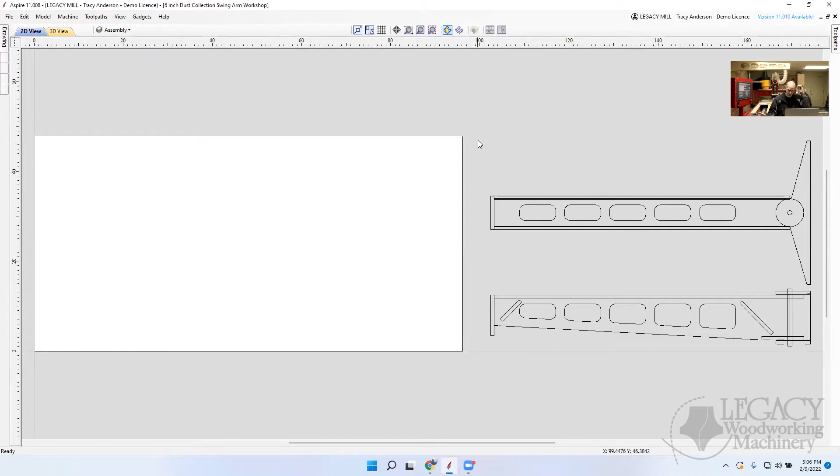Okay, so I've put this on separate layers. So at first, this is my assembly drawing that I just kind of figured out how far away from the wall and how long the arm would have to be. And again, this we drew up in Aspire, which does not have the tangent circle controls. And so I chamfered these, put a fillet on these corners, and so they're all the same. And it looks cool. I like it. I did it the other way before, so it doesn't really matter. But in Aspire, this was the way to do it.

And then I took all of those and I built on the actual 4x8 sheet. I laid out all the parts. Now I took our drawing from last time and I have updated it. I told you I would add some holes in here for the dowels and the mounting holes. And I added the dog bones in here so that we could set the pieces in. And I've kind of cleaned it up and got it all ready for you.

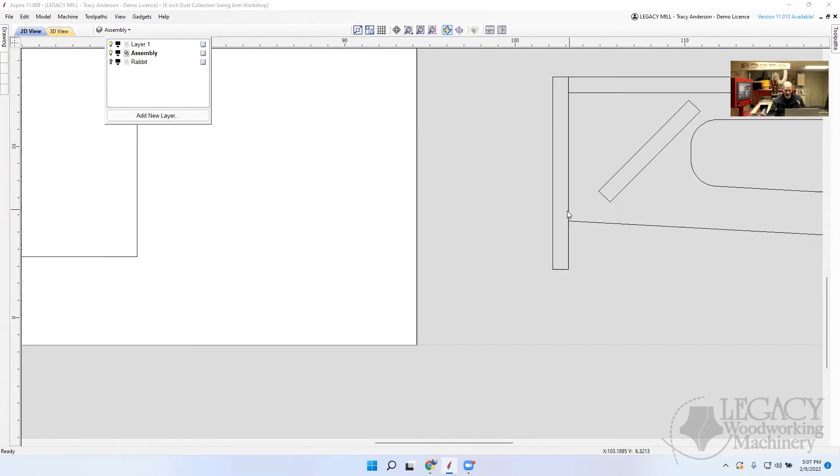And I actually added one more piece. If you look here, there's a cap on the end of it instead of open like the one I have up here behind me. It's just open. But the first one I built had a cap, and I like that. And so I added, this is the cap right here. Well, this is a nice mouse. And these are the screws to mount it.

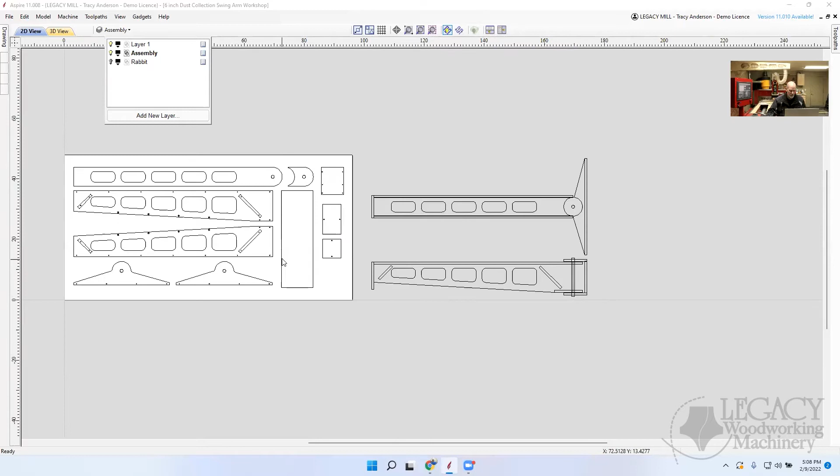And I also added some holes down here. I used the little zip ties, so I can zip tie the hose to this right here at the end to hold it up against that piece to kind of secure it. I also added holes back in here into this piece and in this piece here so that you can zip tie the hoses in at the beginning and at the end, and then we just let it sit on the dowels, which I don't have on my assembly drawing, but over here you can see they're right here.

Okay, so the challenge that I had was making this easy to extend longer or shorter without redrawing the entire piece. All right, so here's what I did. If I click on this, you can see that I have cut this into two parts, here and here. The same thing with this arm, here and here.

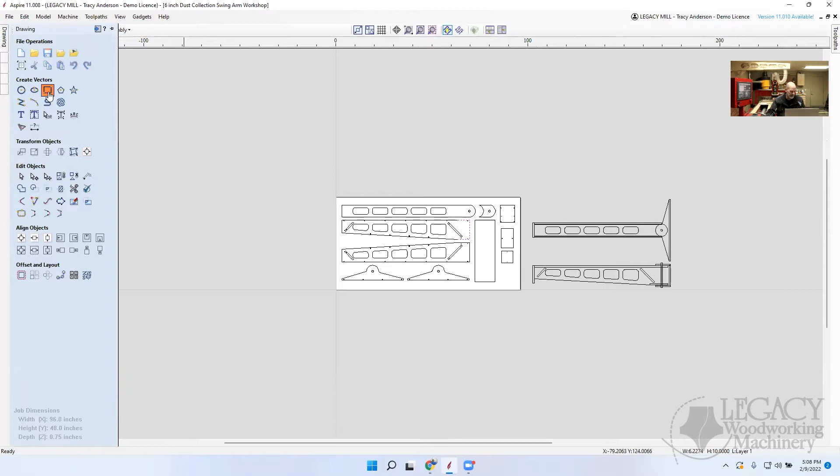So the way that I did that, maybe I'll just draw something up and show you how it's done real quickly. If you're brand new to this, it's kind of an advanced technique, but let me show you what I did. So I'm just going to select this, and I'm going to go into node editing mode, which is here on the side, or you can just press the letter N, and you can see I only have the 4 nodes, so I can adjust those nodes if I want. But what I did was I drew a separate line where I wanted it, like so.

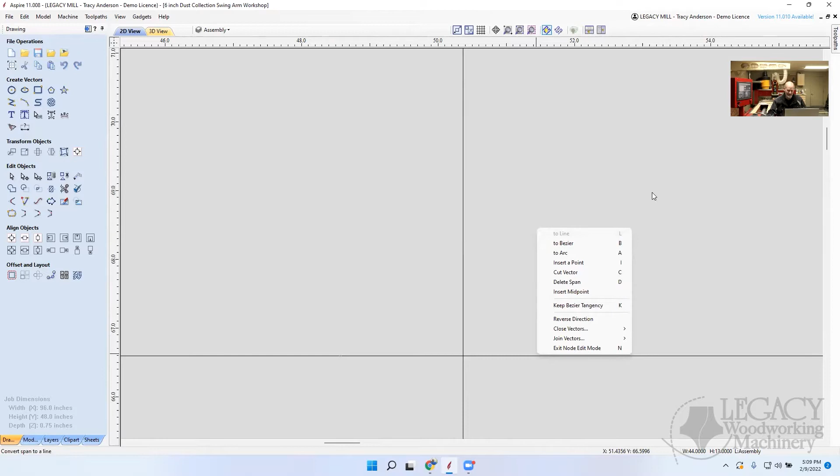And then I went into node editing and came in here, and you can try and do it right here, but it might be easier to just put it in here and say insert a point. And I can do the same thing down here. It doesn't matter where, I'm just going to say insert a point. Or what did I just click on? Insert a midpoint. Okay, so the midpoint is right here, which is not what I wanted.

But you can move those points. So I'm just going to drag it back here so it snaps to that point, and I'll do the same thing here. I'll grab that node and slip it back here. So now I don't need this any longer.

It was just a construction line, so I'll go ahead and delete it. And you can see now I have these nodes. It's still all one piece, but I right-click on this now and say cut the vector, and then I come down here, right-click and say cut the vector. So now I'll turn node editing off, and you can see I have this piece and this piece

separately. Now, the reason I did that was because if I scale this part, I'm gonna anchor this in, and I'm gonna scale this longer or shorter. I don't want it to scale this circle, or down here. I don't want it to scale any of this part right here. I want this to stay the same.

So again, I put a node right here at this point. Select that again. And you can see they're straight up and down right here. So at the end of the flat, I added nodes. And it's the same thing down here on this one. All right. So now I can scale this section down here without scaling this back section.

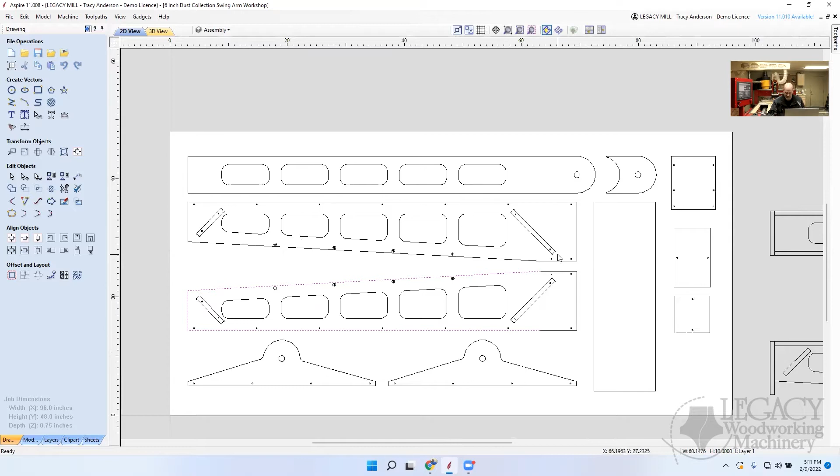Okay. So again, just to recap, I added a line up through here, and then I added nodes. Inserted points is what they call it. They're nodes, but they call it insert a point right there and there. And then I cut it. So I've got two separate pieces.

Right. Now, the other thing that I did is I've got these circles right here. These are 0.51 inches, so I can put a 1/2 inch dowel in here. And I know that when I scale this, these are going to deform, okay? Because the height's going to stay the same, but the width is going to get narrower.

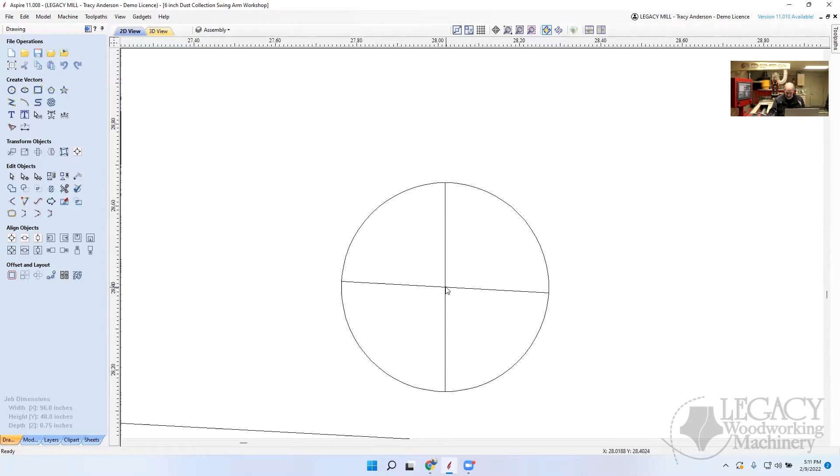So I drew these little crosshairs in here so that I would have a point right there. So I can come back and add a circle at that point, no matter where it goes. These will distort, they'll be no good, but I'll still have that center point with that crosshair in there. So I did that on all of my circles.

And what I did was, I'll just kind of sketch some in here for you real quickly. I'm going to Control-C, Control-V, and I'm just going to move this one down a little bit, right? And I had all of them along there, so I just took a line and I drew it through them, whether it was on the angle down here, you can see these are on an angle, or straight up here

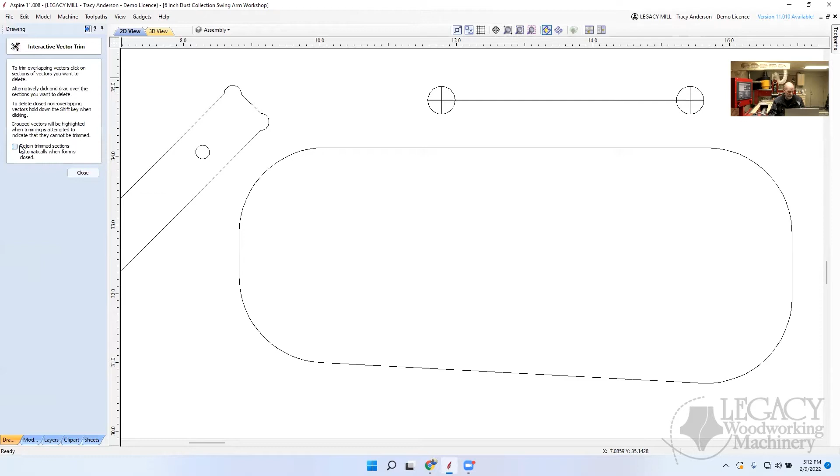on the top. And then I also drew a line just from this quadrant to this quadrant, and hit the space bar, it'll start a new one, and it'll turn to a little square when you get to that quadrant, so it'll snap perfectly. And then I just took my trim tool and I unchecked the rejoin. I don't want to rejoin anything. I just want to cut these. Okay. So that's how I added those crosshairs into each one of the circles real quickly. Now I'm just going to delete these because I don't want them.

All right. So Tracy, one of the things you could do also is if you are using a drill bit, you could leave those holes and let them distort. If you used a drill bit, then it would just go to the center of that hole anyways and drill the hole. Oh, good thinking. Yeah, absolutely. So if you had a drill bit, in this case, it would be a 1/2 inch drill, then you could do that. And because when you drill a hole, I'll just point this out real quickly. It doesn't matter how big this is.

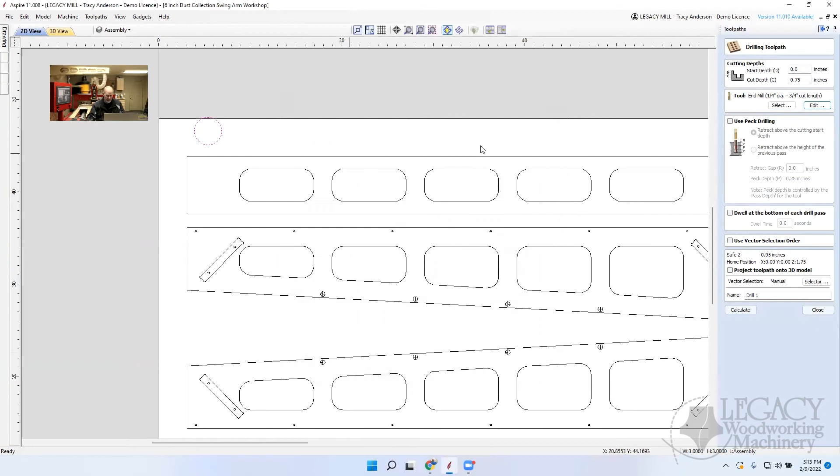If I create a drilling tool path, let me just move my face out of the way here. If I create a drilling tool path based on that, and I select the cutter, in this case, I'm using a 1/4 inch end mill. This is a flat cutting plunge style end mill, so I could actually do this, but I could choose a drill bit as well. And it's going to drill right in the middle of that circle, no matter how big the circle is. So let me just preview that and bring this over so you can see it.

Okay, so that's all distorted. I need to increase my resolution, but that hole is the size of the drill bit, not the size of the circle that I drew there. So that's a good point. I wasn't aware that you could distort a circle and do that.

So maybe I'll try that real quickly. I'm going to take this right here and just, we'll distort it pretty radically. And now let's go back into this drill, and that one's selected, and let's just calculate it.

And I'm going to move my face out of the way. I put it down here in the corner again, and let's preview it. And sure enough, it drilled it right in the center of that oval or that ellipse that we distorted. So that would work if you wanted to drill it.

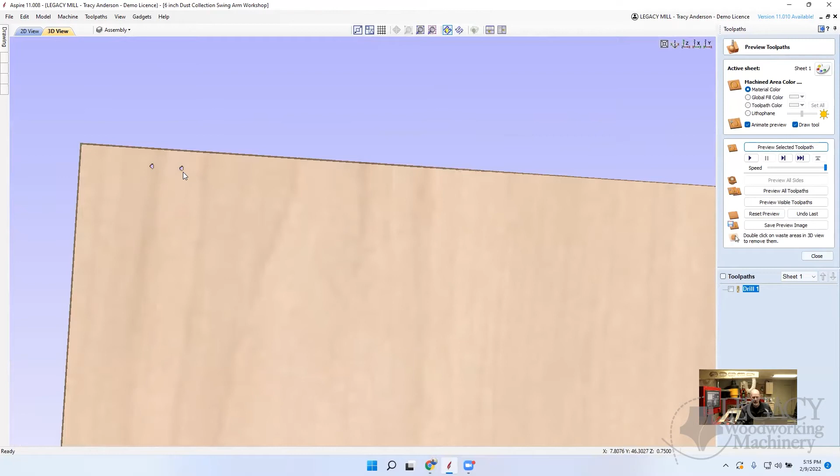Okay, I don't have a 0.5 inch diameter drill, so I'll use a 1/4 inch cutter and I will machine it out. Drill is going to be faster, obviously, and if I was doing production, that's the way I would do it. But because I'm only cutting one piece, I decided I'd use the same cutter to do everything, and so I'll have to redraw those circles.

So one final editorial on that, Tracy, is you just proved that if you have any object and you select it, it will drill to the center of that object. Exactly. Yeah, that's exactly right. That was pretty awesome. So I could drill to the center of this object, or even the center of this piece here, or this piece here, or anything that I have, you could drill in the center of that, even an odd shape, which is awesome.

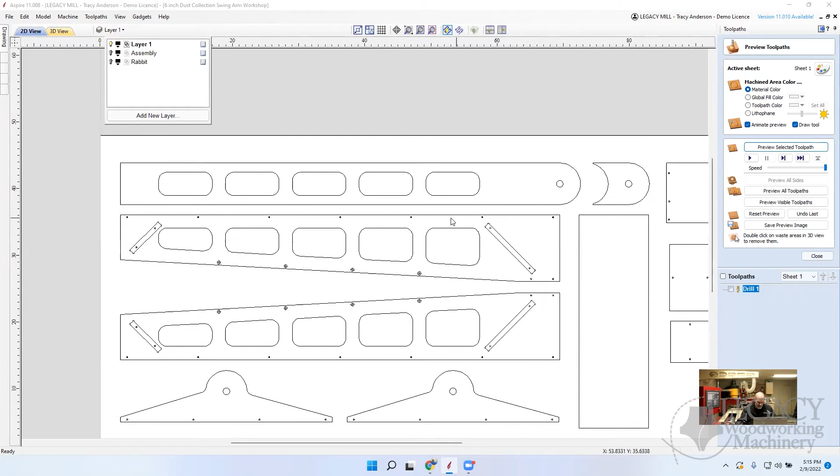Okay, so let me show you one other thing I did here real quickly. I went into my layers and I created one called rabbits. So if I turn that off, I can see just the part I'm going to cut out. But if I turn that on, then I can create a toolpath to machine the rabbit here.

Now, you notice that the rabbit is a little bit longer and a little bit wider. And I made them an 1/8 inch wider, an 1/8 inch on each end, and an 1/8 inch taller in this case. So it'll cut right to this edge where I want it, but it'll overlap the part. And so because I'm using a 1/4 inch bit here, that's an 1/8 inch pass. So in other words, it'll clean this corner up on all the corners.

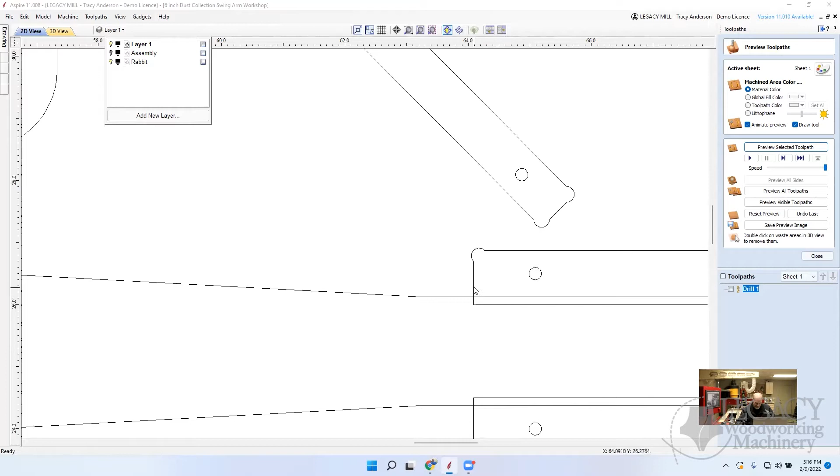And I did the same thing here. You notice this goes past it, so it'll cut a clean corner here, because if it ended right here, I would have a small radius right here from the bit. And the same thing here, I didn't want a radius here, so I overlapped them. And then on the inside, I put the dog bone here, and all those other ones. So that's how I prepped this up. And I did add, again, this one piece right here that I'm going to cap the end.

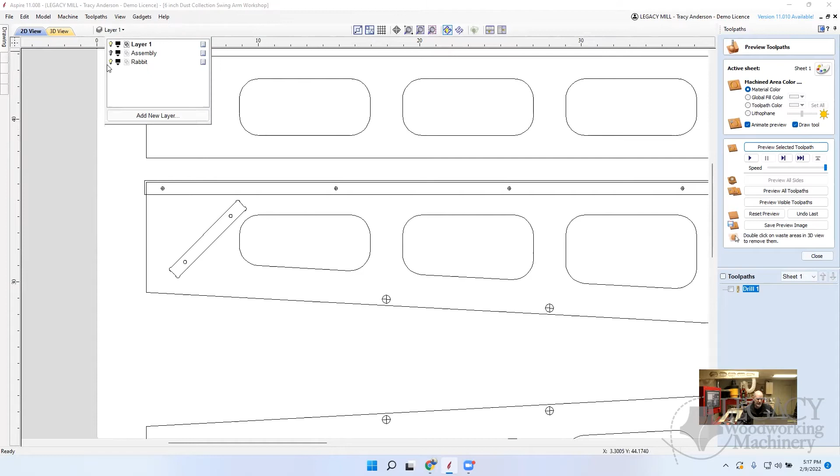All right. So now let's go ahead and do some distortion and scale it and show it. So if I turn these off and I select everything and scale it, these would not be scaled. So I'm going to leave them on. So I've got that layer turned on, the rabbit right here. So I'll scale everything. And I'm going to just click here, and I'm going to drag this out.

Remember, if you go left to right, everything inside of the frame will be selected. If you go right to left, everything that it crosses will be selected. So I intentionally went left to right so that I could grab just the elements that I want. Now, there's a few things I don't want to scale. For example, there's this hole right here. So I'm going to hold down my shift key and click on that to deselect it.

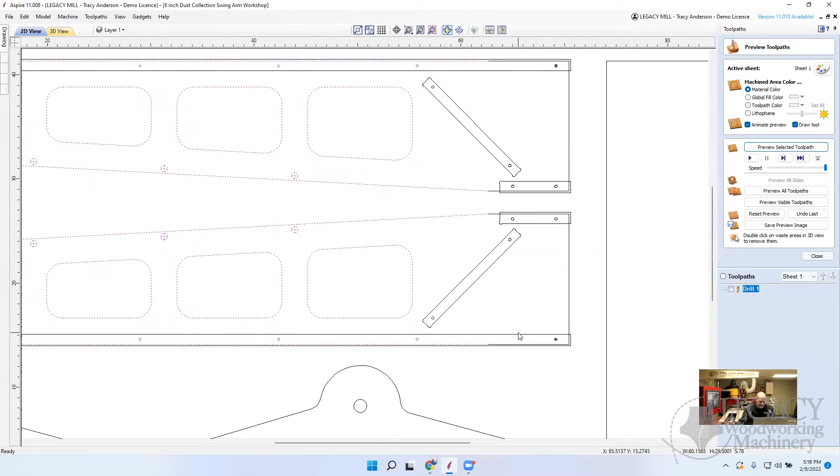So I don't want to distort any of this. I don't want to scale any of this. And then I'm going to come up here, and I don't want to scale this piece or these holes. And so I'd have to do that on all these parts. See, I had one there. And let's see what else. Actually, I want to scale the dados as well. So let's go ahead and select those. Okay, so now everything from this point forward is going to be scaled, but everything back here is going to stay consistent.

Now, there is a tool right here that you can click on to transform mode, which means move or scale. But you can do the same thing simply by clicking everything that you selected, click on it again, any one of the objects, and it puts it into transform scale mode.

Okay. Now you'll notice there's a little node right there. And when you mouse over it, we'll grab that, and I can scale this. Like so, I can make it shorter or longer. So what I would do, to be honest with you, if I knew I wanted to shorten this by, say, 5 inches, then I would draw a line.

This is the way that I would do it. I draw a line right here, and I would move that line into transform objects. There's a move selected object, and in the x-axis, I'd say relative from where it's at. Let's move it, maybe 5 inches. So let's say we want to shorten this arm by 5 inches, or we want to lengthen it by

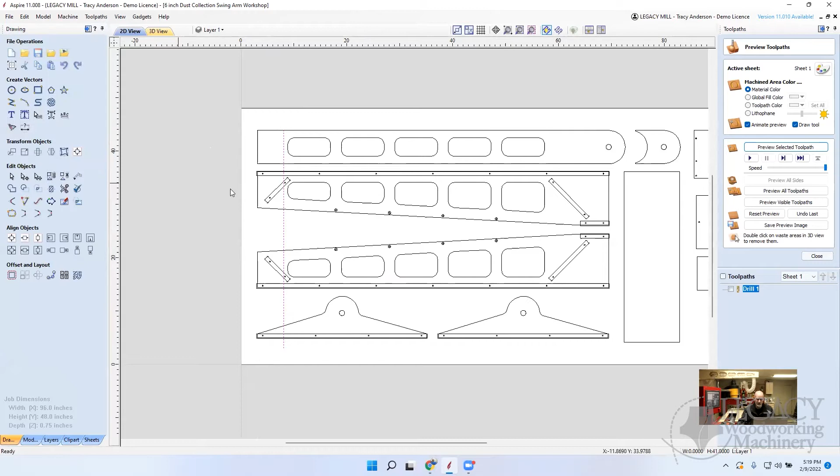3 inches or whatever. Now, if I made it a lot longer, I'm going to have to regroup all these things and make sure everything fits. And if it's long enough that everything doesn't fit on one sheet, I'd have to move some of these components to a second sheet, or somehow rearrange them so I could try and get everything in.

If I took and flipped this one here, then I could squeeze these together. You see how much material we could pick up here, so I could throw some of these parts in here. So there's some things that I could do to make it fit better, but I just laid it out simply like this. All right, so now we've got that line. Let's do this again. I'm going to come back to like so.

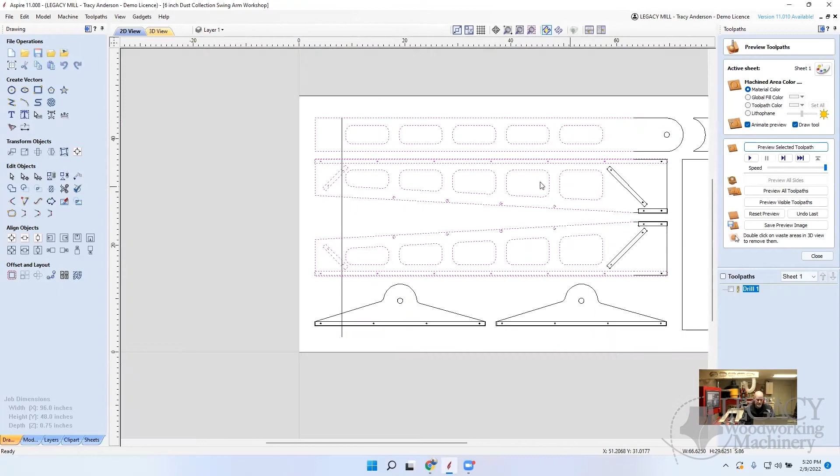Now, the reason it didn't select the rabbet, this rectangle, is because it was not contained inside of the frame. So I'll go back and reselect that. I'll deselect this circle and this circle. And down here, again, I'll deselect these items. And you could take this and say anything inside the frame, again, going left to right, anything inside of it will be selected instead of one at a time, like so.

So we're ready to scale all of this. Again, all I have to do is click on it a second time. I could click this icon over here for transform mode, or I can simply click on it a second time, and that will show up. Now, if I grab this corner down here, it would scale from the corner, so it gets narrower and everything. We don't want to do that. That's why I grab this one in the center, so it'll only scale from this point, and I'll just drag it over to, it snaps to this line. Okay, so now we've made it all 5" shorter.

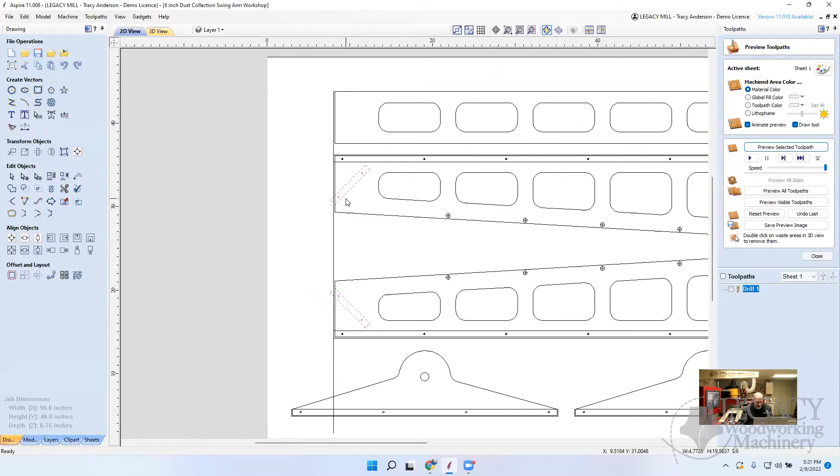And at this point, because I didn't scale these, I didn't want to, I'm just going to bring this in like this, and I'll just use my arrow keys to position it where I want it. If I want to get real critical, I draw a line from here at 45 degrees out, but I'm just going to line that up, and that looks pretty good. So you can get really critical here and draw a line at 45 and snap that to the line, but I'm just going to move it in like that.

And again, this line is just a construction line, so I'm going to erase that. Okay, so now it's going to cut everything out. It's just 5" shorter than the one that I drew. So your problem here, though, is that we could try to cut this out. These parts are not connected. So at this point, I'm going to turn off my rabbet, just get him out of the way. And I'll just zoom in here.

I could now select this and select this. And I could do the same thing with all of these components, and then just use the join tool right down here. And when I say join this vector, okay, the tolerance is probably too small, so I'm going to make it a little bit bigger and see if that'll work. And it's saying no. And I'm not sure why. Okay, I'm going to make it even bigger.

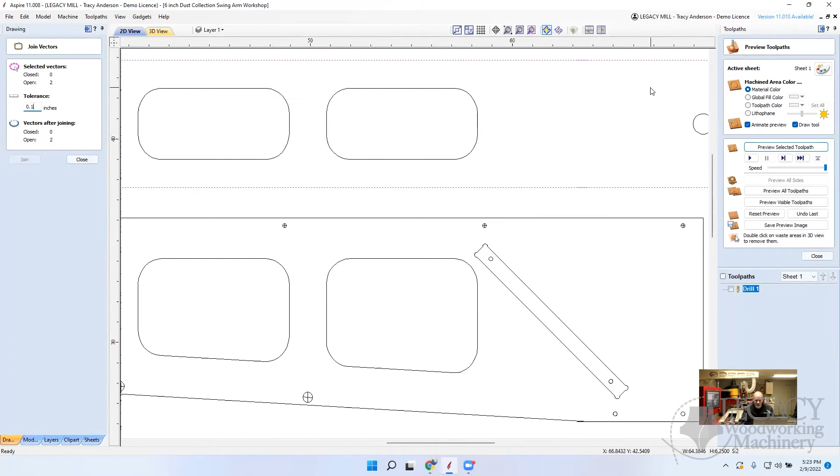That's funny. Why would it do that? There's an overlap on the two of them. There's, oh, probably right in here. Oh yeah, sure enough. Okay, so what we'll do then is we will use another tool. So this is join vectors to a straight line, or vectors with a smooth curve, or move the points so they're together. So this would be the one to use, because if this one overlaps the other one, then I would take this guy and click on that.

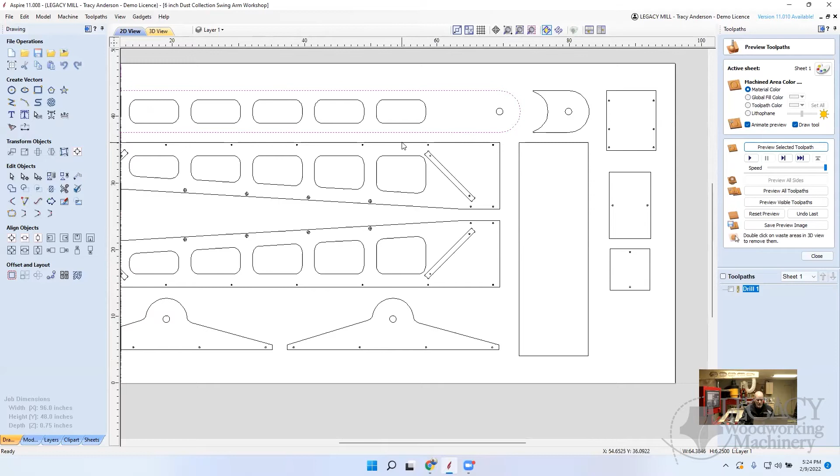And now they are one piece again, and it simply took the 2 points, one was longer than the other, and pushed them together. You got to do it twice. Got to do it twice? Oh, because we got one down here as well? Okay, so let's go ahead and do this one again. Oh yeah, sure enough, and that connected that one as well. So I would do the same thing with this. And I'm just going to zoom in here and see if we are overlapping.

Sure enough, we're overlapping here. So there's two ways. I can just say join those two together, or if I wanted to, I could double click on this and I could grab that point and move it back to here. But it's probably easier to grab these pieces and just join them. Let's just do that one right there. So I'll do this, one time and twice, and that should have connected it. And then we'll do the same thing here.

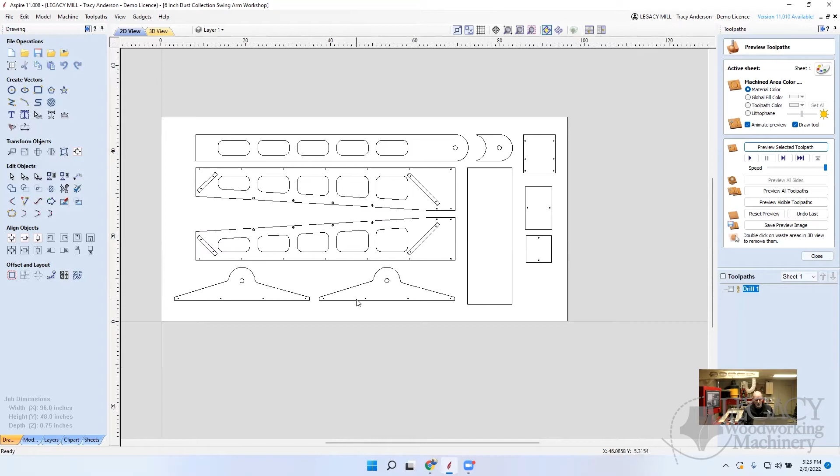Okay, so now all of my pieces are connected so that I can program this now to cut this all out. All right. I forgot to mention one other thing I did. I added in these holes here for mounting this, and of course added in the rabbets that will cut out. And I didn't like the way this came to a complete point, so I trimmed this back.

So this was 1/8 of an inch of material, so I wouldn't have a point in the material. And because I cut that back, I also cut this back. It was out here. I moved it back and I found 7/8 of an inch, 0.875, was enough to give me about an 1/8 inch flat right here. And I like that. So I did some adjustments from what we drew last week, but I'll save all of these. And I've got it saved, back to the other one.

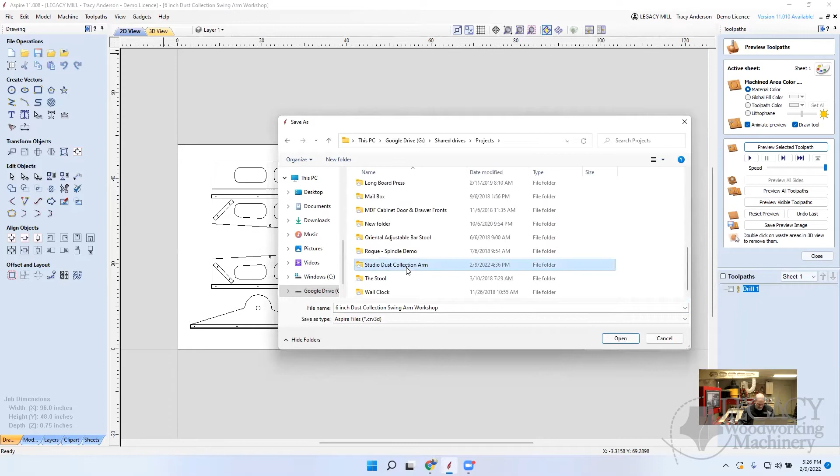So what I'm going to do now is I'm going to say file, save as, because I don't want to overwrite that one. And let me go into my file here, projects, Studio Dust Collection Arm. So this one's called the 6-inch dust collection swing arm for the workshop. And swing arm, I'll just put -5 for the workshop. Okay, so that's the swing arm, -5 inches.

So I've got a copy of each one now. The original, which is the one I'll post, and then you can follow these instructions if you need to make it longer or shorter. Okay, any questions to this point so far? Okay, then the last thing, of course, is just programming, and this is going to be fairly simple. The first thing I'm going to do is erase this drill because that was a sample. We don't want that in there.

All right, so I would not cut the parts out first. So I would take all of these. I have a question. Yes, please. When you resize like that, what do you do with the strength? That's an arm that sticks out there quite a bit, even though it's not carrying a lot of weight in itself. There's quite a bit of leverage.

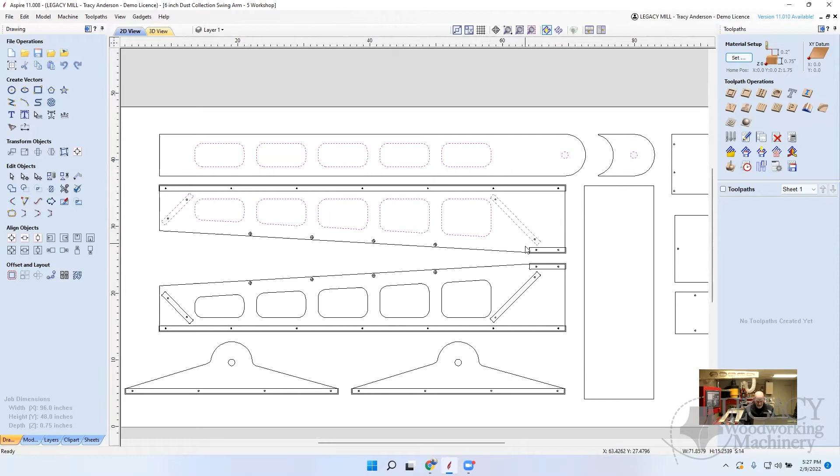Yeah, I've got this pretty wide, and I'll show you what we did here in the assembly. There's actually a 1-inch dowel that goes down through here, and I did cut an 1/8 inch plastic washer that fits right in here. And so it swings really, really easily. And because we've removed so much material with these cutouts, this is pretty lightweight. And if I extended it out a foot, I still wouldn't have any problem.

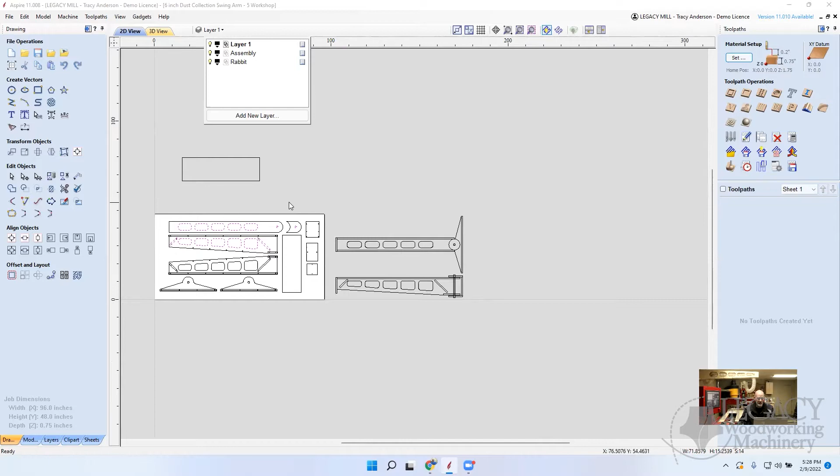The one I've got on here now is, I would say, probably 6 or 8 inches longer than what I need for this table. I didn't know where the machine was going to be placed when I designed and built it, so I made it longer, but it's too long, so I have to have the hose a little bit longer. And so in the last class we showed that if this is the wall right here, we want this end to be about 16 inches from the, well, let's say the arm was up here.

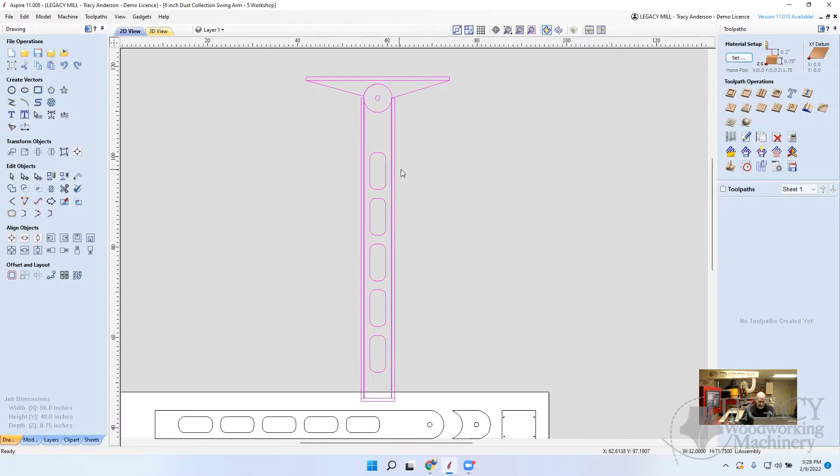Let me erase this real quickly. We don't need this. I'm going to just grab this guy, copy it and paste it, move it up here and rotate it like so. Oops, not that far. And what I'm going to do real quickly so I can make sure I can select this easily is I'm going to group these. So there's an icon here, edit objects, that says group them. And if I click that, you can see they're not dotted any longer, it's solid lines. That means if I click on any element, it chooses the whole thing.

The reason I did that is because if I bring it down here like this, I've got all these elements and then I'd have to go select each one of those to move it or get rid of it, which would be a nightmare. So I grouped them so that I could place this where I want. I would double click so I can move it. And I grabbed this end here and I brought it all the way to this edge. Then I wanted it back about 16 inches. So I would use my move tool right here, and I'd say relative in the y-axis, let's go 16 inches.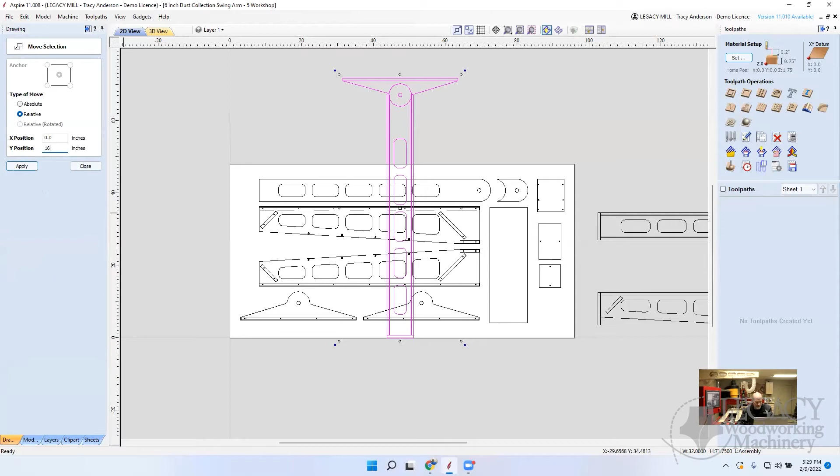Okay. And that's where I want the end of it. Now, this says that this from the wall, you see how far away from the wall it is, that table? Quite a bit. So I would draw, if this was, I think my table was 39 inches away. So I would draw a line along this edge. And then I would use the move tool under transform, and in the Y, I'd go 39 inches.

Oh, it's actually pretty dang close. Okay, so this one is designed pretty much at 39. It's only off by, you can see, 3/4 of an inch. So I probably wouldn't worry about this. I'd probably leave it. So this was set up for 39 inches and left 16 inches here. And so as it swings, the hose has to reach back here. When it's in the middle, it has to reach back to this corner. When it's over here, it has to reach out to this corner. So that's about right. Okay, so you can kind of play with those.

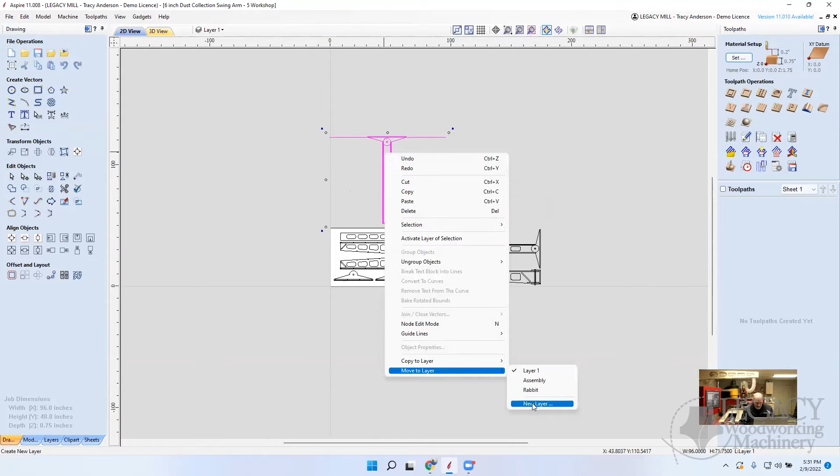And again, by grouping all of this, and I can group all of it, I'll group it again. Then if I click on it the second time, I can just move the whole thing out of the way. And I would probably move it to a new layer so I can turn it off. So I'll click on move to layer, I'll click on new layer, and I'll call this the swing test. Okay, or something like that, so that I can simply turn that layer off and my assembly off so they're not in the way.

All right, so let's go ahead and program this one. But if you cut the exact one that I built last time, you would have to make sure you join these back together and program it from there. You wouldn't have to scale it to get it to the length you want. So let's go ahead and program. And to start with, I'm going to turn my rabbet joints off. All right, so I'm going to select this guy. Well, no, we're going to cut out the parts first.

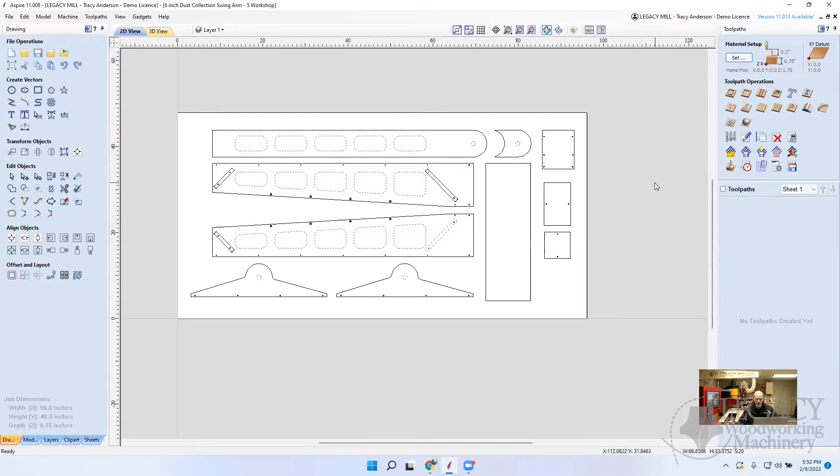If I go right to left, anything that it crosses gets selected. If I go left to right, only what's inside the frame will be selected. Okay, so we'll cut all those out, and then we can do the same thing here. Cut all those out, and that. No, we don't want to cut this out. I'm sorry. Those are only an 1/8 inch deep, so we'll do those separately. So I'm just going to cut out these. We can cut out these circles. All right. So we're going to cut all the way through here to remove all of these parts. Oops, I got one more. Yeah, there we go.

So now I'll go ahead and cut these all out, and we'll use the profile toolpath to do this. And I'm going to use a 1/4 inch diameter end mill to do everything, so I don't have to change the cutter. So when I cut out the rabbets, it's going to take a little longer, because if I used a 1/2 inch or a big surfacing bit, it would go much faster. But I'm going to do it all with a quarter, so I don't have to change the cutter at all. So this says it's going to go 3/4 of an inch deep. Okay, and that will cut all the way through.

If you had a spoil board and you wanted to add maybe 10 thousandths, I'd go 0.76 in the depth right there. Let me move my face over here out of the way on my screen. Okay, so I'm going to go just 10 thousandths through to make sure I cut all the way through. This is plywood and it's finished ply, so I don't want to leave an onion skin, because then it can chip or peel or be a pain in the butt to finish. So we make sure we cut all the way through.

And you can see here, I have chosen, this is a 2 flute. Oh, this is the 1/2 inch. This is not the one we want. So let's cancel that. We'll click on select, and we'll use an end mill, and I'm going to use a 1/4 inch, 3/4 of an inch long. All right. And you can pull the left side of that out to see all the.

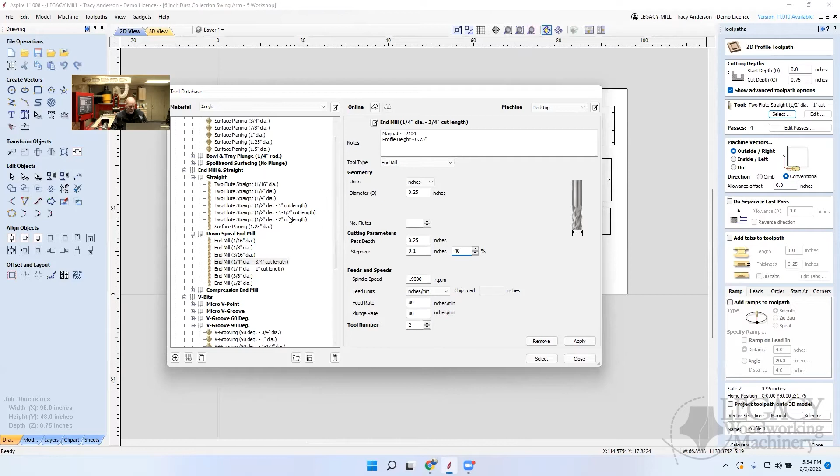Yeah, absolutely. You can pull this guy here out, and there's actually a way to go into your settings and save that so it remembers it. I don't remember the exact thing to set, but I think it might be under edit or it might be under file or whatever. But it'll keep this open this wide to make it easier. So next time you open, you don't have to scale it out again. But we're going to skip that right now.

I'm just going to grab this cutter. I'll make sure it's 40% step over. And we have a pass depth of 1/4 of an inch, which is acceptable. That's fine on this guy. And you might even push it a little bit; with a bigger spindle, you could push it deeper. In fact, I've seen it cut full depth, 3/4 of an inch in one pass. But we're going to be a little bit more conservative here.

We'll do it in multiple passes, just because if you got a smaller spindle or whatever, you want to take it a little bit more easy. So we'll be cautious here. And down here, I'm going to tell it has 2 flutes. And so that tells me that it's only a 2/1000 chip load, and that's at 80 inches. So I'm going to push this up. We're going to go 150.

Now, again, this is pretty conservative. I'd probably cut it about 300 inches on my 4x8. Okay, so on a bigger machine with a bigger spindle, I could push these numbers up. You can always adjust it on the fly as you're cutting as well. So we're going to program it for 150. Again, kind of conservative, but when you see that, it's about 4 thousandths of an inch, 0.39.

So I'm going to slow this down to 16,000 RPM, and it calculates the chip load over here based on the RPM and the feed rate. So we're at about 5 thousandths chip load. Okay, and that's doable. We could actually push it up to about 8 thousandths and be fine. So we could push it down to maybe 14,000. And that makes it 5.5 thousandths.

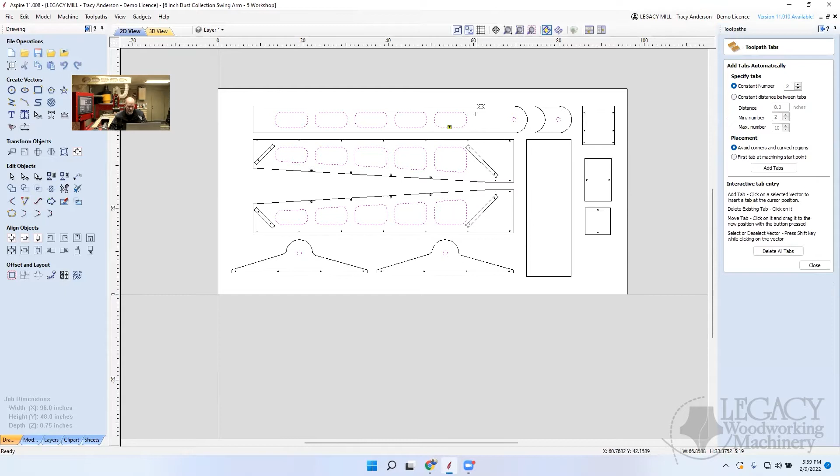All right, and then we're not going to add any tabs here. Although you might want to. If you're using a 1/4 inch bit, you may not need tabs. But if you want to add tabs, click on here, and then you can go in to say edit tabs, and you can tell it exactly where you're going to put a tab on these if you'd like.

Okay, I'm not going to tab this right now, and the reason I'm not going to is because if you use a down cut, which I use so I don't tear up the top grain, it's a spiral down cut, it will push the sawdust into the groove behind it, and that will hold the part in place. Right, so this works well.

Now, just one heads up, these 1-inch circles here, that's a little small. And if you're nervous about that, I would not include these circles with this profile toolpath. I would do this as a pocket mill. In other words, it would turn this whole circle into sawdust. There would be no little piece left in here that could catch the bit, right?

So that is a very legitimate way to do it. It's slower because you got to turn that whole plug into sawdust instead of just cutting around it, right? But just something to be aware of and something you might play with. Okay, in fact, I'm going to do that. I'm just going to deselect all these 1-inch diameter holes. We're not going to push our luck, because if the bit grabs that, it can bend the bit and cause all kinds of problems. So let's eliminate those and just cut out these bigger circles. We're not going to use tabs.

All right, and we are going to ramp, and I like to use just a smooth ramp with an angle of 20 degrees. That's the optimum angle for ramping for pressure on your bearings of your spindle and the tip of the router bit. Okay, so that's the default that you'll use for this type of work. All right, so we've got everything in here set.

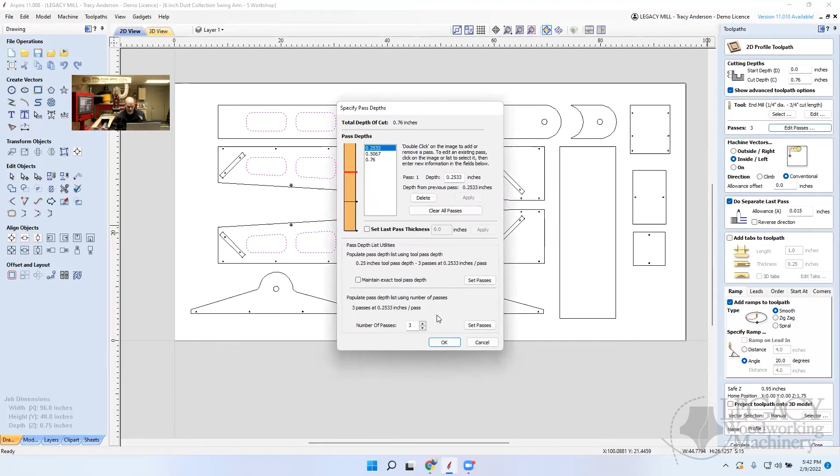Okay, to be honest with you, I personally would probably set this for 2 passes because of the size of the spindle, and do a separate last pass. And so instead of 3, 2, it's going to speed it up. That's the way I would do it. I feel comfortable with that. If you're uncomfortable, make it 3, but 2 is going to work. I've seen some stuff done where they do it in 1 pass.

They just slow their speed down, and they cut it in 1 pass. Okay, perfect. Right, so it's going to be called profile 1. So I'm just going to give this a name so I know what it's supposed to be doing, and I'm going to say cut out details or something.

All right, and it says it's going to cut through, and it's always going to tell you that. It says the material is 0.75, you're going to go 0.76. I'm saying, yeah, I know. Okay, I'll accept that. And then it'll always bring up your preview, and just click on preview, and you can see. And if you want to, you can double click on these components, and they'll go away.

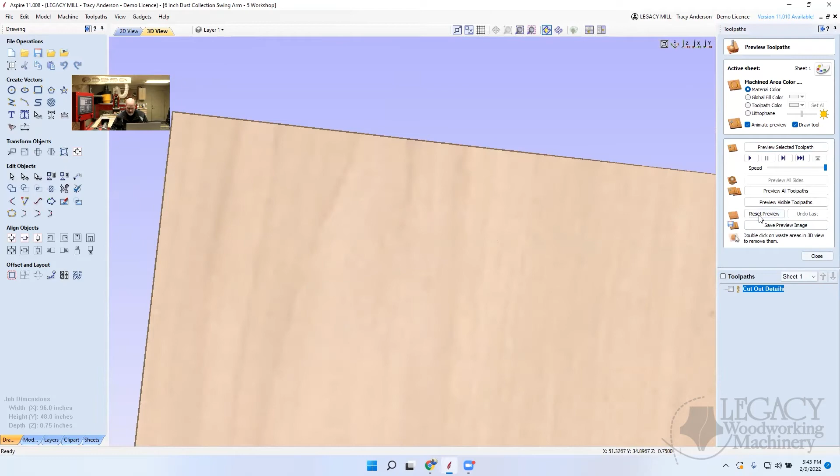And I just noticed I still have these holes up here from before, so I'm going to reset my preview and then preview this, and so those holes are gone because that was left over from the last time I did it. Okay, and if we want to take the time to double click, you can get all these out. I'm not going to do it right now.

We'll go on. How do you feel about using a compression bit instead of a down bit? Compression bits are great, but you're going to do it in 1 pass, or you can do it in 2 passes as long as your first pass is deeper than the upcut on the bottom, and typically they're about 1/4 of an inch. So in this technique, it would work. You could, but I'm not going to.

The only thing is, I'm not going to ramp with a compression bit. I'm just going to plunge straight in and cut all the way out. Okay, because if you ramp, where you're ramping down in, it's lifting and it's going to tear the grain right there where it starts. All right. But I like compression bits. We're okay with this without a compression bit.

I use it on melamine, definitely, but on this ply, because it's sitting on the spoil board, it's backed, so I really haven't had a problem with a downcut on this type of setup with this material. But a compression bit's perfectly legitimate. All right. I know a lot of people go to compression, go to a 3/8, gives it a little bit more strength. It has to remove more material, but there's trade-offs on that as well. And again, a little bit beyond the scope of this class, but it's doable.

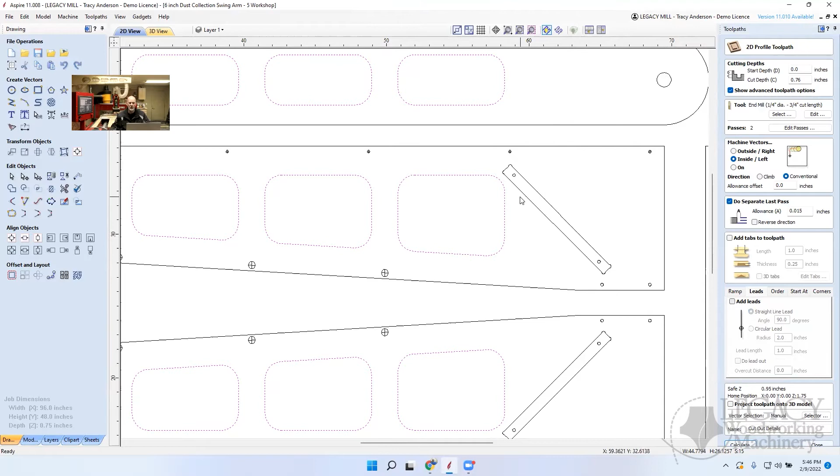But the lead-in, if it's on a straight line, cuts into the line and then starts cutting along the line. And a ramping on a lead-in would work. I'm just not sure it'll work with these closed vectors, and so I'm just going to use a down shear and ramp the half inch. So all of those are perfectly legitimate. It does work. You just have to lead in from the inside of your cut. Okay, versus the outside of your cut.

Okay, so let's go back to leads and add a lead in. Okay, we got a straight lead in, we got a circular lead in, and radius, lead in length, 1 inch. Now, do we know this? Is it going to lead in from the inside because we're cutting on the inside? Does anybody know? Leads in from the outside. Okay, I'm gonna just try this and we'll see what the toolpath looks like. One or more leads were clipped or removed.

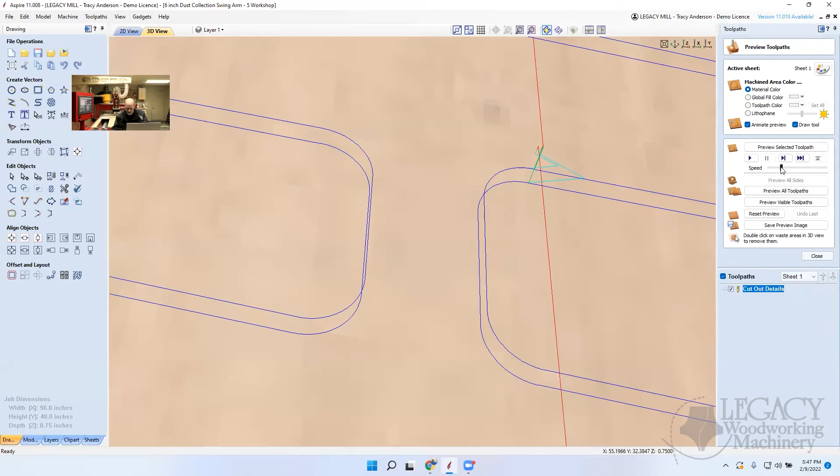All right, so you can see the lead in right here. Yeah, this is actually here, and it's leading and it's doing the ramp, so it's doing this zigzag thing, and then in. Interesting. So I'm gonna reset my preview. I'm gonna slow this down, and we're going to select this and see. I'm zoomed in close so we can see it when it gets to this point. I may have slowed it down too much.

Okay, yeah, it was too fast. I sped it up too much. Okay, again, you could play with lead in if you want to use the compression and then you could ramp in. I'm not going to on this one. I'm going to use my down shear, and we're going to take the leads out, and we're going to calculate that and save it. Okay, so now I'll zoom back out. I'm going to reset and preview it. So that's the way we're programming this one.

You're now doing this on a vacuum table, is that correct? Yeah, I would do this on a vacuum table because it's going to hold the pieces down. These will be held because of the down cut. It'll kind of put sawdust in these grooves, and that will act as a method of holding a part. The smaller the diameter cutter and the bigger the part, the less likely it's going to cause a problem. And that's exactly why I took these circles out, because I didn't want it to catch the edge of the cutter and cause a problem. So these we're going to do differently. But yeah, vacuum tables are great for this work, for sheet processing.

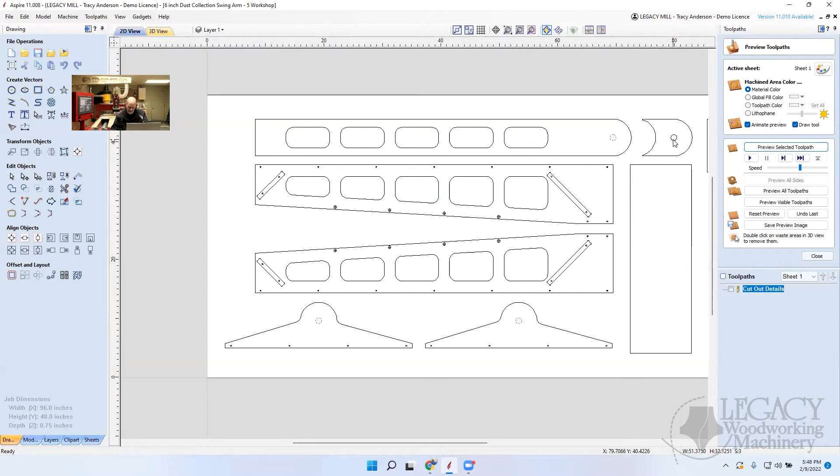So I'm going to grab all those circles, and this time we're going to use a pocket toolpath instead of a profile. And this is using a couple of mills. So I'm just going to remove all these, and then I'll say select. I just hit the remove button. Sorry, it went really fast there. But I'm not going to use another cutter, because you can use a larger cutter to remove most of the field, and then a smaller cutter to cut the corners by using multiple cutters, but we're not going to do that. I know there's a way to save it out like this, but I'm not sure how to do it. This is version 11.

It's changed a little bit, but I'm going to use the same cutter again. This is the end mill 3/4, still bit number 1. And it remembered all of those because I applied it and saved it all in here. It remembered everything that I had done before. Well, I haven't got to those other circles. I'm sorry. We'll get there in a second. So the cut depth is going to be the 0.76. We're going to use the end mill. It's going to do it in 3 passes, which is fine.

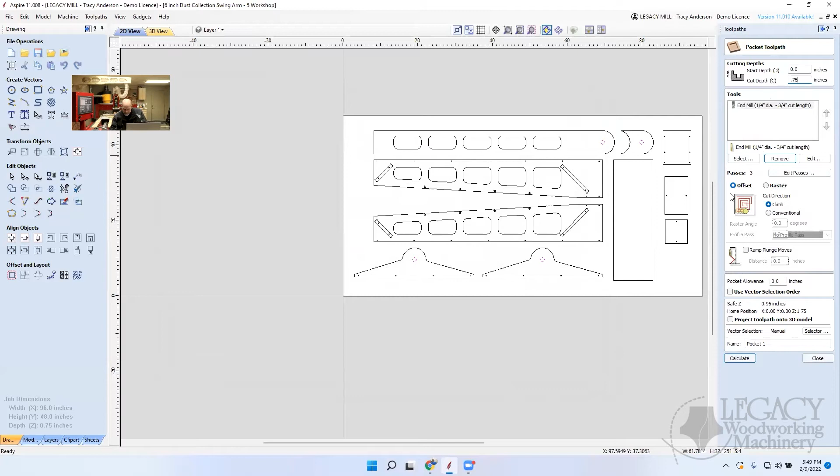We're going to use an offset, so it's going to cut in a circle, and it'll start in the middle. I'll zoom in. It'll start in the center. It'll roll out so it gets to the outside. Raster means it would cut back and forth like this and then cut around. I don't like this for the small diameter, so we're going to do an offset. And we'll ramp this. And in this one, because we are doing a pocket, we don't have any control over ramp other than the distance. We can't do a spiral. We're going to use the spiral on those other holes, which I'll show you in a second, because a profile toolpath will do that. A pocket will not.

So in here, I'm going to make this a very short distance of 0.25. So it's going to come down pretty fast, but it will ramp okay. And then we'll call this pocket 1-inch holes. Calculate that. It's going to cut through, and now we'll preview. It's the same cutter, so it's just going to cut these first, and then it's going to go grab these and cut those next. And we can create the toolpaths in any order, and then we can rearrange them if we'd like.

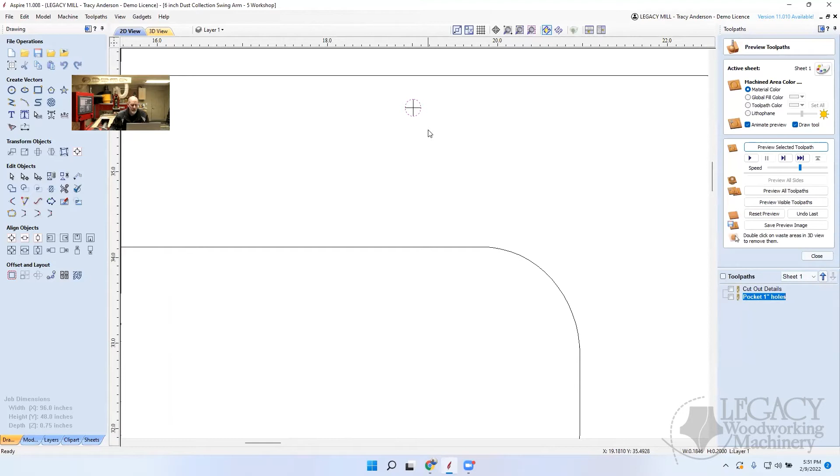Okay, let's drill all of our holes next. Okay, and this is an issue right here. This, we can actually leave that. I didn't realize this before, but because we're going to drill these with a drill bit, I don't need to have these crosshairs. We could have deleted those and done away with it. I didn't have to do those. Down here, though, because we're machining these out, I will need to do that. So let's create a circle right here.

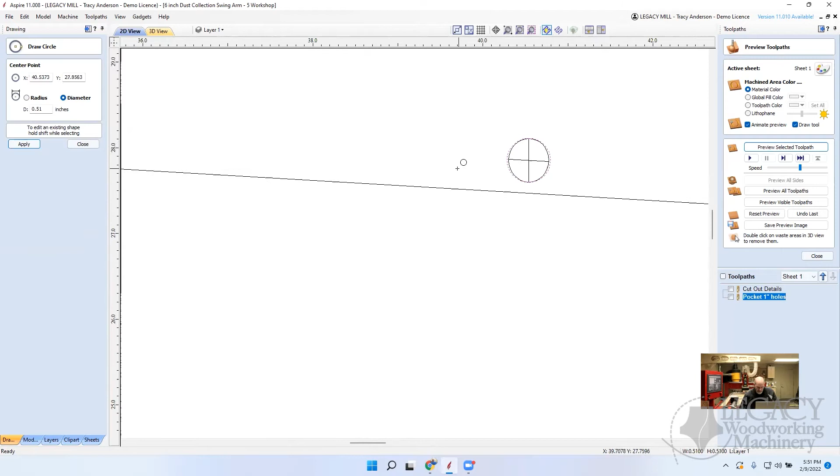And I'm going to make the diameter 0.51, so just a little bit over ½ inch. And then if I put my mouse right there and click it, you can see how it created that circle. And so I'm going to do that for all of these. And again, that's why I created the crosshair. And I probably should have deleted that distorted circle first, but we can do that afterwards. It won't be as easy because there's 2 circles there and I got to make sure I select the right one. So it would have been smart to delete those first.

What are the crosshairs for? Okay, the crosshairs are so when I click out here, it creates that 0.51 inch diameter hole. And the original circle is this one here that was distorted. It's narrower, and I need it to be a full circle. So by using the crosshairs, I could just go here.

Now that brings up another question though. The crosshairs may be totally... whoops, let me create a circle here. I want to try something real quickly. I may have created more work than I need. So there it's distorted. And now if I say cut me a circle that's 0.51, oh, sure enough, it snaps right to the center of that. So I didn't need those crosshairs. That's why I asked.

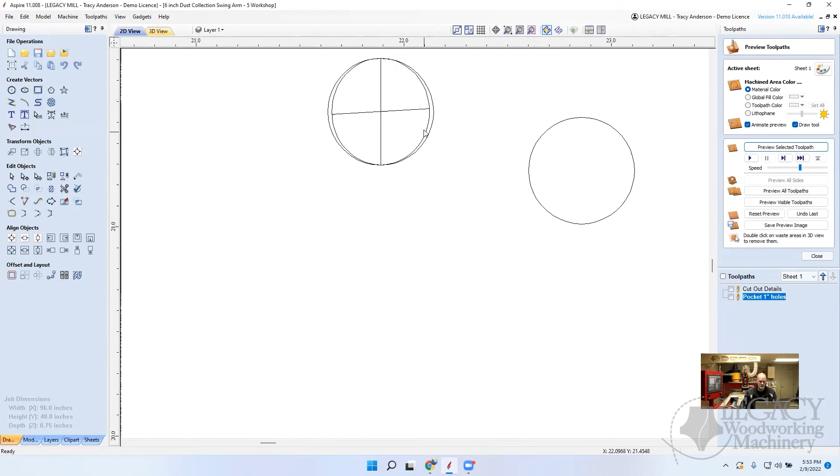Like I say, a lot of people have a lot more experience here than I've got and are smarter than me. Feel free to jump in. I was just curious because I jumped away to look at the lead-ins, and I can show you that if you want me to show my screen. You can do a lead-in and a lead-out so you don't tear up your material. Okay, let's do that. Let me finish this off and then I'll let you share your screen and you can show that.

So we've got the circle there. I think we've got all the circles in here. And you're right, I didn't need the crosshairs at all, and that's good to know. And I didn't need them up here either because we're just going to drill them. So forget the crosshairs. You need to delete that dummy hole. Say that again? Oh, delete this dummy guy, that hole there? That's what I was talking about. Okay, let's delete that. All right, so I'm going to get rid of the crosshairs. Before I post this video, I will take the crosshairs out so that you don't have to worry about that.

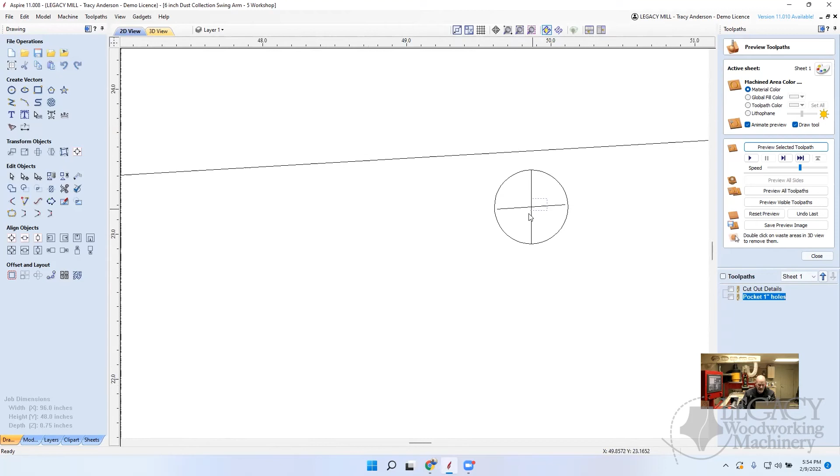And this is going to take a minute. Oops, wrong one. And this is one of the reasons to leave the crosshair, to be honest with you, because if I had deleted these circles first, then when I drop the circle in there, I wouldn't have to be careful to make sure I grab the inside one. So I guess there's advantages both ways. Well, you could have also put the new holes on a new layer, then turned off that layer, removed all the other holes after you placed them, and then put it back on. Oh, good thinking. Yeah, I love layers. That's the best way to do it, actually. Okay, we're going to delete all these crosshairs, and again, before I post this video, I will get rid of all those.

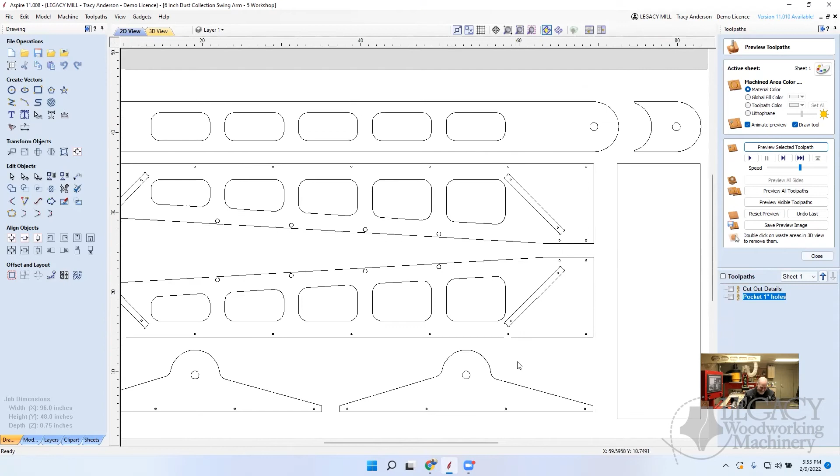While I'm at it, I'm going to get rid of these as well. It really won't matter for this class, but Carl's in here tonight, and he explained to me that he and I are not OCD, we're CDO. What is CDO? Because CDO is OCD in the proper order. So that's what I am, CDO, and that's why I've got to fix this, or it's going to drive me nuts.

I'm the same way. That's why I asked why you needed the crosshairs, because I draw in AutoCAD every day. So I'm like, what's he doing those for? It's just from the CAD experience. Less clicks and picks. Right. Okay, so I've gotten rid of all of those, so we should be good to go.

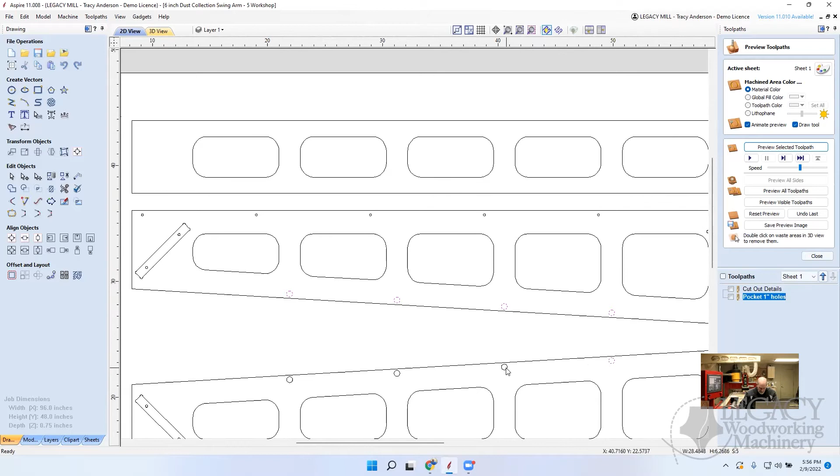All right, so we've got these big cutouts done. Now let's go ahead with this cutter in here. We're going to drill these holes. And again, if I just draw a square around them, I can select them very fast instead of selecting them individually. The other ones we're going to drill. Okay, so that's all good. Now you're always going to be left in this preview mode, so you'll always have to hit close in order to get back.

So I'm going to say use a profile toolpath. It remembers 0.76, we'll use that. It remembers this cutter, we'll use that. It remembers that we did it on the inside. That's perfect. The only thing that we're going to do differently is we're going to add a ramp, but we're going to use a spiral ramp.

Okay. Now, because this takes 3 passes, each time it spirals around in a circle, it's going to go down 1/4 inch, and it's going to continue that to the bottom, and then it'll run all the way around the bottom at the same level. So I love the spiral ramp when doing small holes and machining them out.

And we'll call this, what do we call this? We'll call this the dowel holes. Yeah, dowel holes. There you go. So 2 L's or 1? 1. Okay, let's fix that. So we'll have just 1, dowel holes. Okay, and we'll calculate that. Going to cut through, and we'll preview that just to make sure we got them all in here. That looks good. All right.

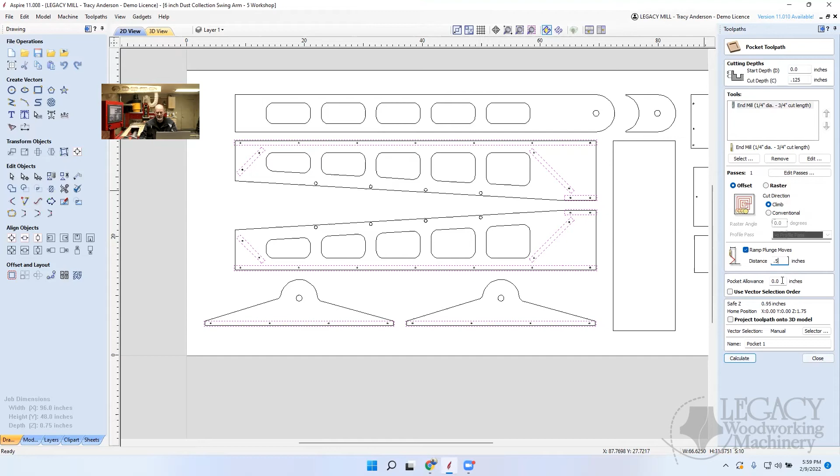And a pocket allowance. Now, pocket allowance will say you can make this just a little bit bigger or a little bit smaller if you need to. If you wanted to make sure the parts fit in here, we might make it oversized. Pocket allowance maybe 10 thousandths or maybe 5 thousandths, 0.005. Okay. You already did it with the circles though, ahead of time. Yeah, I don't think we did it with these pieces here. Okay, so these are just the rabbet. Yeah, the rabbet. We're not doing any holes right now. This is a dado actually, and these are rabbets. And all we're doing is machining that out. And I want this one to be a little bit wider to make sure the part fits in there. So we're going to go 0.005.

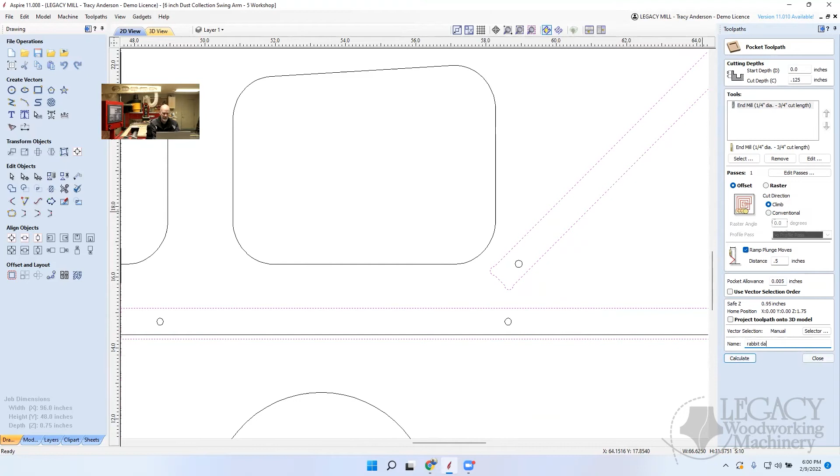Now, I can never remember if that's going to make it bigger or smaller. It's got to be a negative or a positive. It's negative. So I'm going to call this rabbet dado. Okay. All right. And here's how you can tell if it's negative. I'm going to go back to my 2D view, and it's showing the arrows in the actual tool path, but I need to stretch this out because my zoom thing's in the way. So I can't see this. I'm going to have to resize this, make it a little bit smaller.

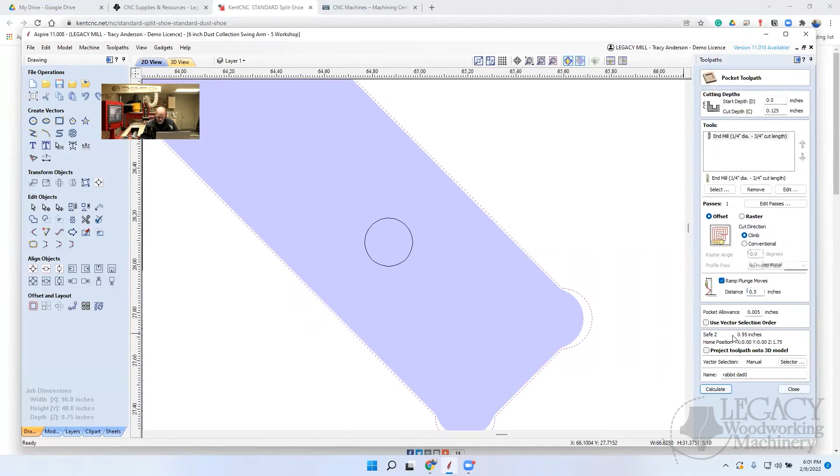So I'll come up here and click on this wireframe and solid. So now it's turned to a solid. You can see this is going to make it smaller. So you were right, negative would fix that. This is going to make it tighter. So let's just double click on that and change that to a negative. All right, and then we'll calculate it and go back to our 2D view. And sure enough, you can see how it cuts outside the line, so it makes it slightly larger.

All right, perfect. By doing that with your rabbets, don't you throw the offset off for your horizontal pieces when you put them together, 10 thousandths off? I'm sorry, 5 thousandths off.

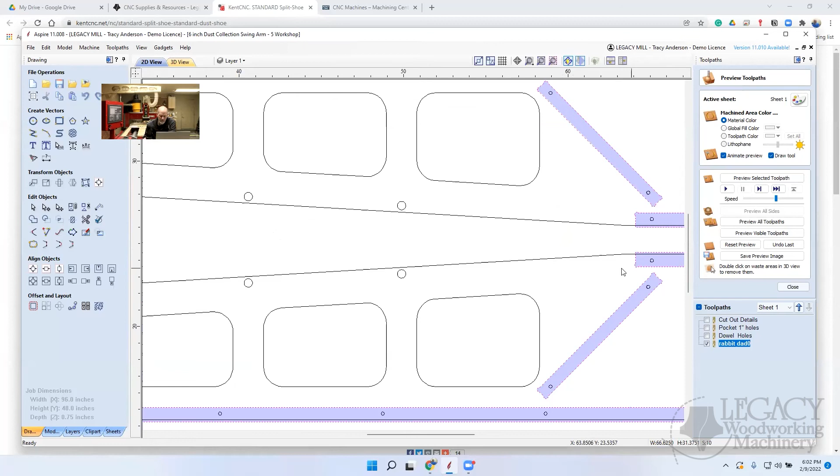Say that one more time. By putting that offset in the rabbets, you shifted the parts when you put them together 5 thousandths. Is that going to be an issue? Well, by doing that offset, I made the rabbet itself, okay, so it's going to cut 5 thousandths of an inch deeper here. Pretty much irrelevant. You're gonna put that top piece across right there, and if it sits down 5 thousandths more, it's not a big deal. So in this case, I didn't worry about it.

If you had to have this one land exactly on the line and not go over, then you would have to do these as separate, a rabbet and a dado, and you'd have to apply the allowance offset to the dado only. But in this case, it's not going to throw anything off. It's fine. Yeah, 5 thousandths is not a lot of material. It just made everything a little sloppier, so it'll fit together easier. Yeah, the dados will all fit together, and of course the rabbets don't matter.

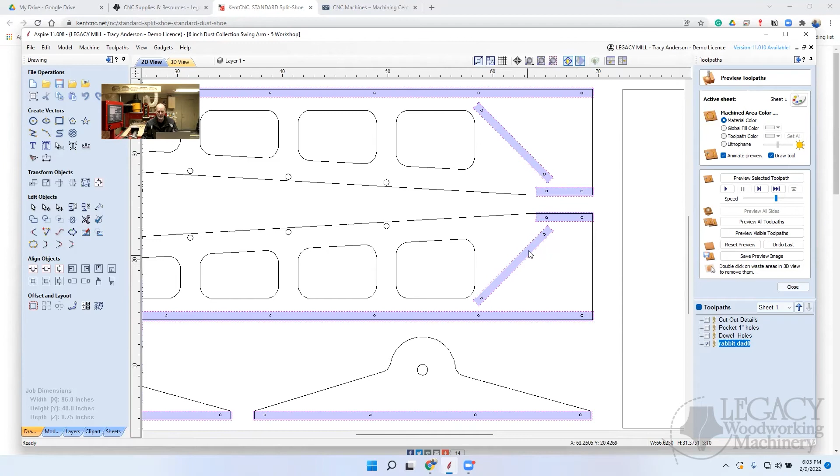You're just going to butt it up against that edge anyway, so that won't be sloppy because it'll go against the edge and get screwed in and glued in, so it'll be just dandy. But you will have a little bit of space to put these in, which, to be honest with you, if they're not perfectly tight, I don't care. They're captured inside of here, and they put screws in here, so it doesn't matter, and they're not even visible. You can't see them at all, so that's all good.

So just to be clear, that 5 thousandths offset in those dados actually makes it 10 thousandths over. Yeah, so it's 5 thousandths on this side, 5 thousandths on this side, so it's a total of 10 thousandths. You're right. And that's why on these rabbets, it's only picking up 5 thousandths on this edge because it's only cutting on this edge. This is overlap, so it doesn't matter if it goes out farther here.

Okay. Now let me see. We've got to cut out our holes. We've got our pocket. We've got our dowels. We've got our rabbets. Let's preview the rabbets. Yeah, this is going to take a second. Simulating.

Doing rabbets on a nested-based machine like I was, it's always key that you check, in this case it doesn't matter when you're saying you're 10 thousandths over, but if it was going to matter, we would always have to check, mic the material. And depending on the material, one bunk of material could be different than the next. When you start cutting a couple hundred cabinets and you don't double check your material, you might not have, that's why a lot of shops don't do dados, because it can be a hassle.

Yeah. So we told this when we did the job setup, when we first created it, we said the Z0 was on the bottom so we could control how deep we cut into it. And so if the material is not 3/4 of an inch, the depth of that rabbet and dado can be too shallow or too deep. In this case, we've got plenty of tolerance. It doesn't matter at all.

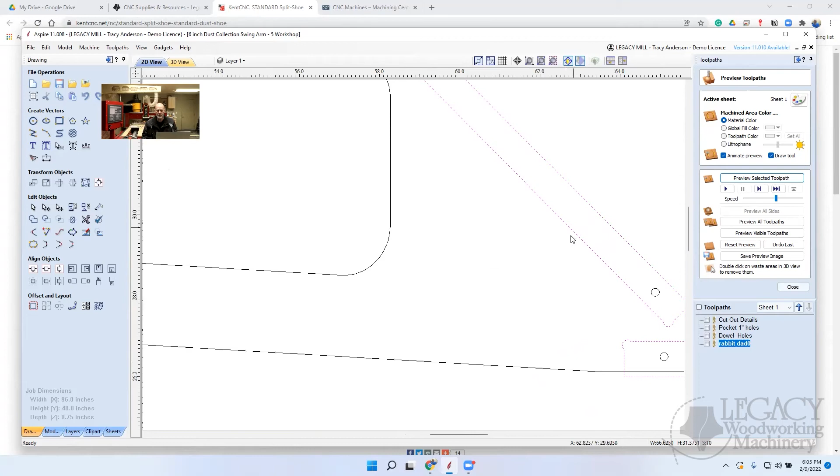What I'm referring to is the size of your dado. If your dado is too tight, your material is not going to fit, depending on where your material came from, whether it's 19.05 millimeters, or is it 19 millimeters? That can make a big difference. Oh, right, I see what you're saying. That's what I'm saying. So you're saying, yeah, the width of this obviously may not fit if the material is a different thickness. So you'd have to mic it in order to create this. Correct. Okay, perfect. Got it.

I'm just throwing it out there. In this case, it doesn't matter because you're making it bigger and you don't really care. But in a situation where you did care, you definitely have to always check the material before you even start cutting. Oh, good point. Excellent. I second that with Patrick. I always mic my material before I do it. Otherwise, your cabinet's not going to end up the right size. Right. Cabinets are a different story. The precision there is you want it as perfect as possible. This one's a lot more forgiving, so we don't have to worry about it too much.

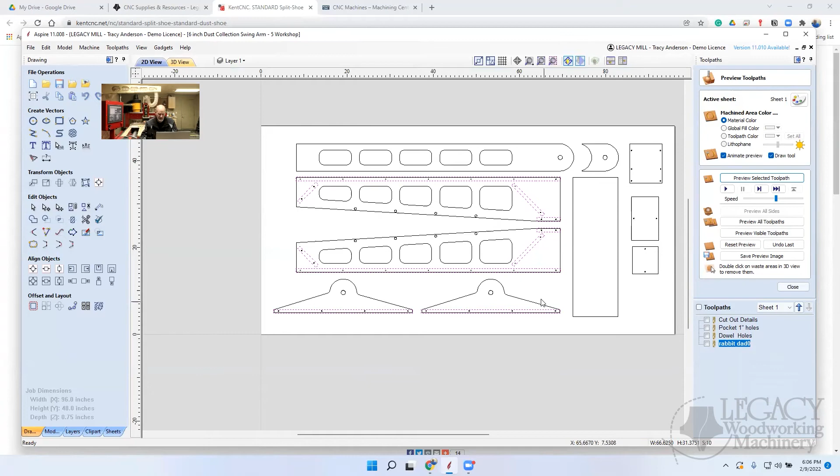So, all right. So you can see how we're coming together. We've cut our rabbets, our dados, our holes, cut out these various components here, these cutouts like so. All right. So let's now go back and see what we've got left. We cut out the details, we pocketed the 1-inch holes, we cut the dowel holes, we rabbeted the dados. All right, now let's say that we decide to drill these holes next. And so I'm going to select all the holes that we'll drill.

And again, by going left to right, I can select these pretty quickly because it's only what's inside the box. And of course I could have done all of that, or you can just click on it like so. All right, let's catch these guys. And then we can catch all these.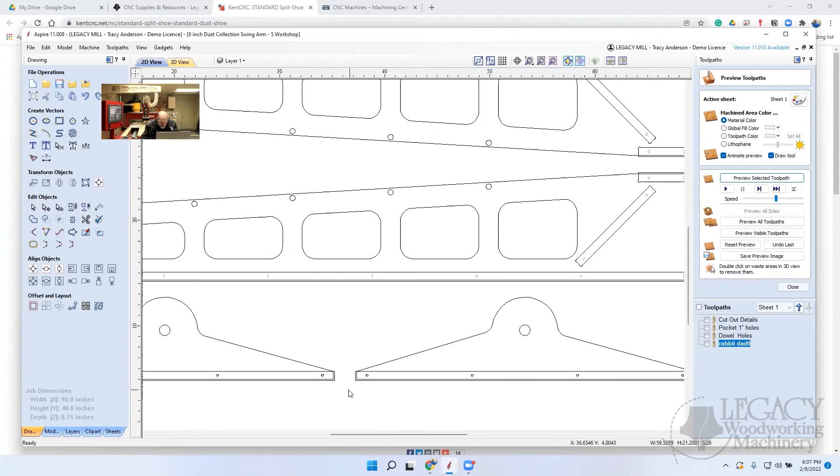What do I have left? I have this. And, oh yeah, I've got these at the bottom. Missed that last one. Okay, so now I've got all my, oh no, I don't have these holes selected. All right. So we'll close our preview, and this time we'll use the drilling toolpath.

And now you're probably going to drill. We are going to have to change. You're going to drill with a drill bit, not with a 1/4 inch. If I drilled with the 1/4 inch, of course, we'd have a 1/4 inch hole, the screws would go right through. So we're going to change this.

Now, a drill bit is not flat on the end. It's got a little bit of a point on an angle. So I'm going to go a little bit deeper. We'll drill deeper into our spoil board to make sure we get the straight edges of the drill bit all the way through. So I'm going to go maybe 0.775.

What did I put? I didn't put point. 0. See, this is where I need my glasses so I can see what I'm doing. And I can't see it, so I'm going to erase it. I'm going to do it again. 0.775. Okay. All right, and this time we're going to go to our drill bits.

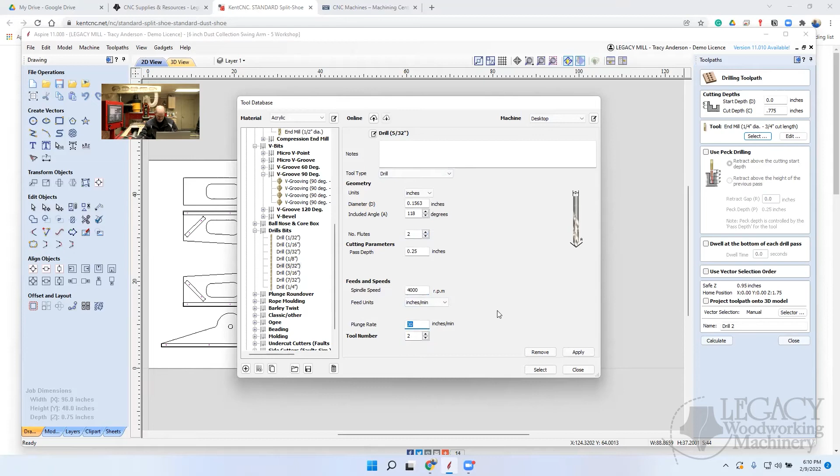Let's say we're going to drill out to 5/32 of an inch or 3/16. I would change this to number 2. And this has 2 flutes in it. And our cutting parameters, our cut depth is 1/4 of an inch. And we're only going to spin it about 4,000 RPM, inches per minute. And our plunge rate is going to be 30 inches a minute. Okay, so we're going to go ahead and apply that and select it.

Tracy, real quick, if you were to use brad points, would the settings be close to the same? Have you had any experience with them? Brad points, the tip of it comes down just a little bit, so you would have to still drill through the material a little bit, but I like brad points because they don't drift. So you don't need as much depth because the brad itself just barely points through a little bit. So I like those.

Go ahead. Would you set the RPMs about the same as a standard bit? No, the standard bit's going to be much higher. When I'm drilling with a drill bit, because of the spindle, I don't want to go slower than about 3,000 RPM. So you'd set it at about maximum 5,000 RPM.

If I'm using a little tiny spindle, I have to set it up a little bit higher or else it can stall on bigger bits. Small bits won't matter, but with big bits I need to be real careful. And I might peck it and make multiple passes. You just don't want to overload the bit. So this says use peck drilling. We're going to do that.

And we're going to retract it above the height of the previous pass. Now we're going to retract it a gap of 0.125. So it'll retract it, lift all the chips out of the hole, and then it'll plunge back down. That's what peck drilling is, a little bit at a time, and it'll go down that 1/4 of an inch for each peck. And if you want to, you can have it dwell. I never have, don't think you need to.

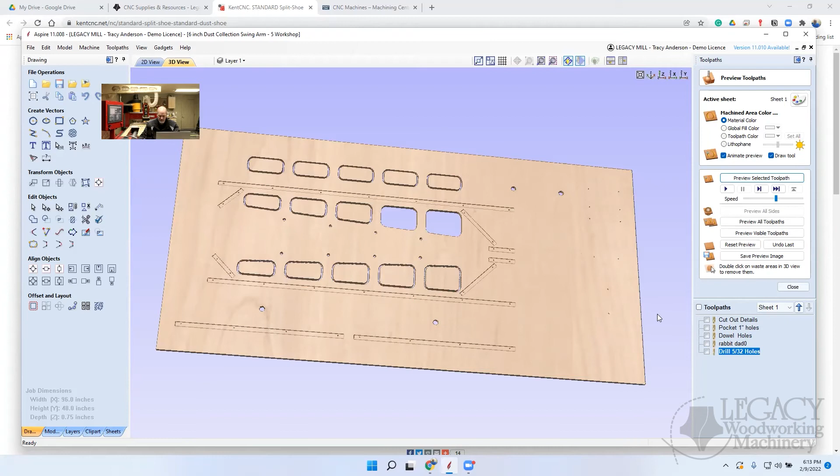All right, so we've drilled all of our holes. And now the last thing is cutting out our parts. So let's just select all the parts we're going to cut out. Close our preview and go to our profile toolpath. We're going to cut on the outside of all of these lines. We're going to cut the 0.76. We're going to use the 1/4 inch end mill, same thing.

I'm going to change the passes to 2 instead of 3. We'll do a separate last pass, again, of 15 thousandths. And if you wanted to, you could add tabs. I don't think it's necessary. You might want to do it on the little pieces. So let's just do that. You click on Edit Tabs, this button right here, and then you can just click on where you want to put those tabs. These pieces up here are all going to...

You didn't use 15th. You have a 005. Oh, I used 5 thousandths? Up one. Separate last pass. Oh, separate last pass.

Thank you. Okay. Somebody's got eyes and can see what I'm doing. That's nice. All right. You'd save yourself a lot of heartache if you just get an extra pair of glasses and leave them there. I know. I need like 8 pair. I just put them on every desk and every computer and everywhere I go.

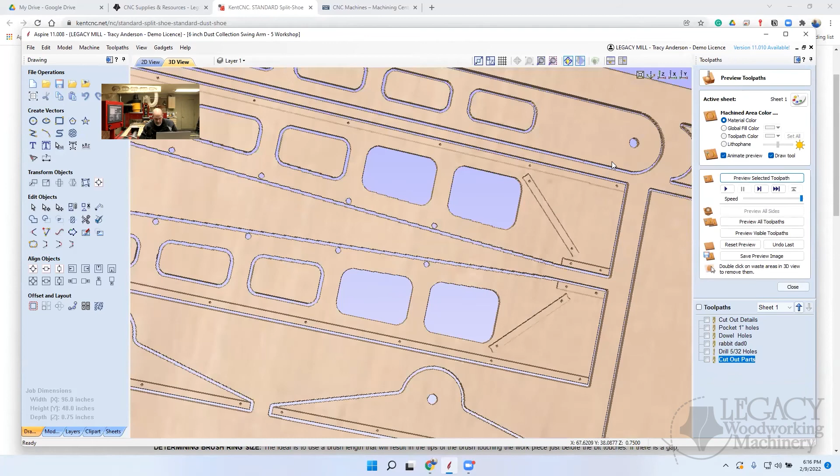All right, let's preview this and see if we've got everything done. Oh, I can speed this up. Right. And of course, all these will come out. Now, normally I could click on this big material and erase it, but because I put these tabs on, it would erase these parts as well. So we won't do that because you've got tabs here and here. On the smaller parts, I put those tabs.

Without the tabs, after you cut those at first cut, you need to remove those, don't you? The tabs? No, there are no tabs the way you've done it. I only put tabs on this part here and on this part. Do you want to leave the cutouts, pieces of wood in there for all the rest of the cutting you're doing?

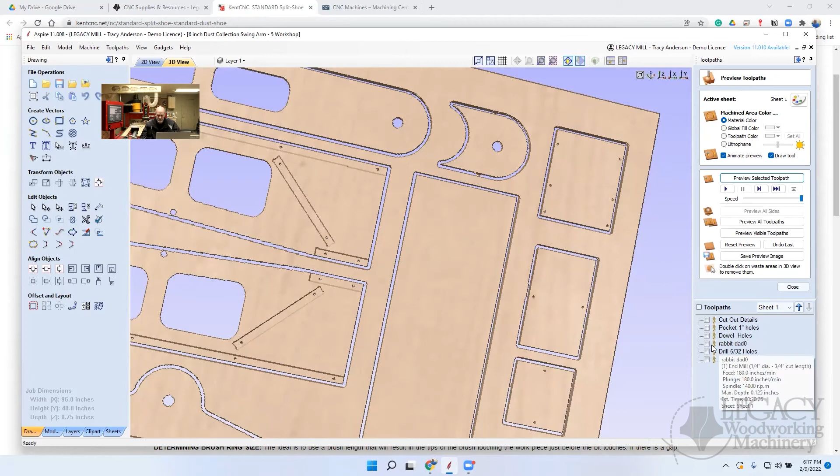All right, good point. Now we'll always cut out the part last. So we've done all of the work first, then we simply cut out the parts, and we leave those in until it's all done, and then we'll just pull the parts out. And it's on a vacuum table. It's on a vacuum table, so everything's going to be held in place. Like I said, I've cut several of these.

This works beautifully. Okay, the only problem I have here is that we use the 1/4-inch bit for every operation except for the drilling. So this would have me change right here. I don't want to change to a drill and then back to the 1/4-inch. So I'm simply going to push the drilling to the very beginning. And that's what I would do first. In fact, I would probably put the rabbet and the dados, and I misspelled it, next, because those are just making real light cuts. Then I might cut out my dowels. So those are kind of small.

My cutout parts are going to be last. Pocket the holes I might put up here. Then cut out the details. These are larger, so I do those second to last, and then cut out the parts last.

Okay, so now if I reset my preview, we can kind of zoom in on this. Maybe I'll set it up like this. Let me close this out so we can use more real estate here. Move your drill bit back up top. Oh, did I? Oh, yeah, you're right, I did.

Okay, so rabbet, then there are rabbets, okay, so this is the order I want to do this in. Now, if I say preview all toolpaths, it's going to go pretty fast, but okay, so the last thing it did was cut out the parts. And then these, of course, we'll just pull the whole parts out and start assembling.

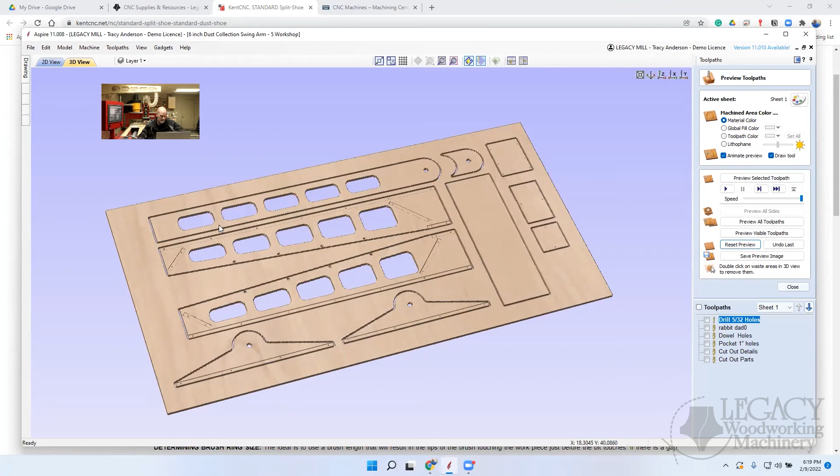Okay, any questions? Yeah, Tracy, what's going to hold your 1-inch dowel in place to keep it from falling through? Oh, good question. I'll show you what I did. I got a 1-inch shaft collar. Let me turn this layer back on. This is an assembly. So right here, you notice that I had it come above here 1/2 inch and below 1/2 inch. And so I'll put the shaft collar right on here.

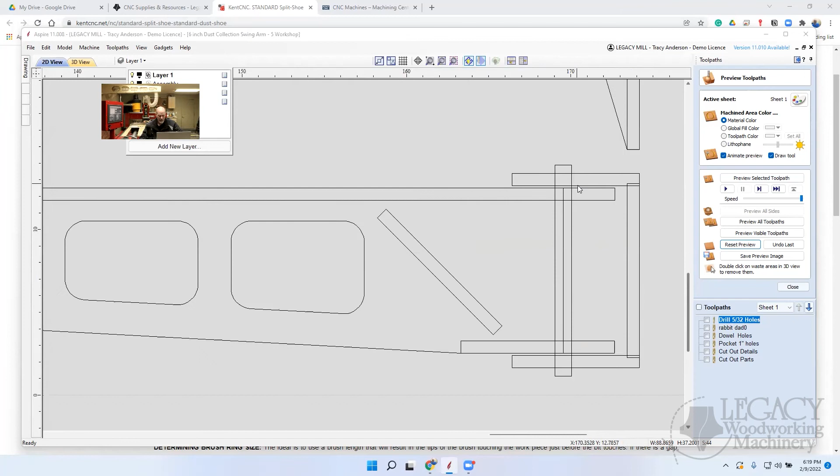The ID of the shaft collar is 1 inch. So when I clamp it on, you don't need one at the bottom. You could if you wanted to, but you don't need it. Just put one on the top and clamp it on, and it's done. Did you put your spacer washer both top and bottom? I did, and I didn't bother to do this here.

I will post the file, but it's pretty simple. I can't do it in this file because it's a different material, but I simply cut a couple of circles. And so I said, let's cut a 3-inch diameter circle here and here. Oops, that went back to 1 inch. Okay, so this one here is 3. This one's only 1. Let's move this to the center of it. Okay, and so I cut out the 1-inch diameter hole and then cut out this.

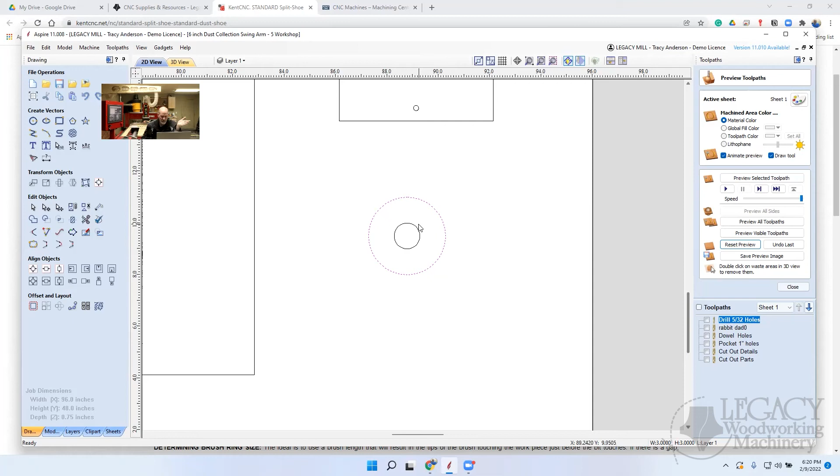And when I cut this one, I did use a tab on this outer piece because I didn't want it to grab and jump because it's pretty small. And I did not use a vacuum. Yeah, maybe I did use a vacuum table. The sheet that I had is only 12 inches by 12 inches. So I don't think I used a vacuum table to cut that. I just stuck it down with double-sided tape and then cut it out. So I did use tabs.

And again, I bought that material on Amazon. It's the 1/8-inch plastic, and that worked extremely well. It was a white, I don't know what type of material it was, to be honest with you, but it works really well. I'm cheap. I would have used a piece of milk jug.

Yeah, seriously, you could make that 1/4 inch instead of 1/8 inch, and you could use a piece of 1/4 inch MDF, and it would work. Especially if you sprayed that with a little Dynaglide, when you assemble it, that thing would spin like crazy. So you don't need to use the plastic ordered in. You can use virtually any material, especially if you wax it with the Dynaglide.

Okay, I'm going to go ahead and save this then. Now I'm going to post this file and the other file, and I'm going to post the error codes. So I'll look for Milo. He was going to send them to me, so I'll post those on the site. I'll have to create PDFs out of it unless he sends me a PDF. And then I'll post all of these so that you can pretty much make this any way that you want, any size that you want to go.

Okay, any questions? Yeah, Tracy, post them as DXF as well, please. Oh, DXF these drawings. Oh, that's right. That's right, because older versions can't open it.

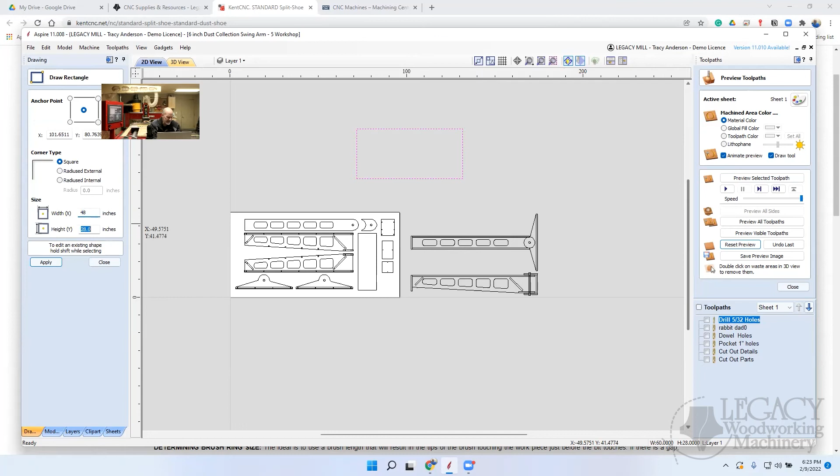Just real quickly, here's what I do. I always draw the size of my table that I'm going to cut. And let's say that I'm only going to cut on the standard table that's on there, which is only 48 inches long by 24 wide. It's actually 49. Now, if you extend the table and make it bigger, of course, you would draw that table.

Okay, and then I calculate how far away from the wall it is. So let's say the wall is right here. Then if you create a pivot point right here, you need to swing. When the gantry is all the way back here, your hose is going to be here, here, and at this end it'll be here and here. But back here, well, it can go all the way back because the table is farther. So let's say you want to go to all 4 corners.

Then just calculate that with that distance away from the wall, you're going to have an arc. So let's do something like this. Let's say the arc is, oh, I didn't do circle, sorry.

Problem I had was when I used the turning station, the hose was actually behind, and it got hung up on the spindle and popped a screw off of it. How is it behind the gantry? Is it draped down behind the gantry? Yeah, because the hose actually came from the wall straight across the center of the bed. And when your spindle is in the forward position like that, the hose actually drapes over the top.

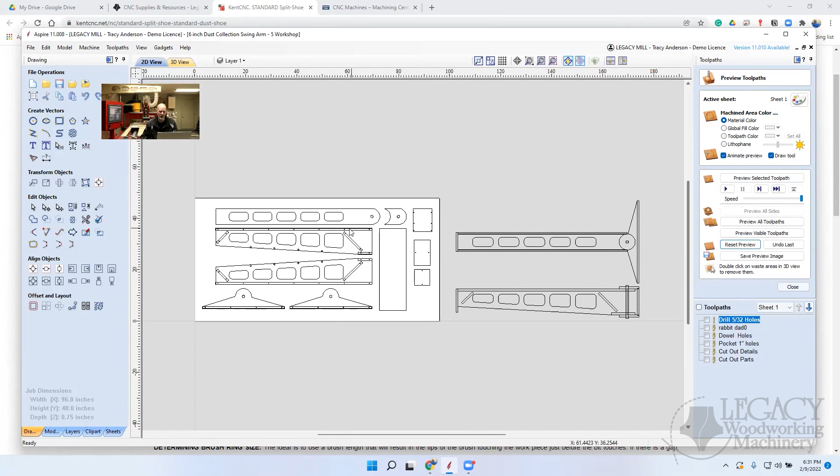So just recapping the techniques that are really powerful that we used here: by adding nodes and cutting these vectors, we were able to stretch or resize it, and the width stayed the same. It's just the length gets longer or shorter. So you can modify a part. You just select the components you want to compress or expand and deselect the others, which is kind of an advanced technique, but it's pretty awesome.

The other thing, we showed you several different milling techniques using a spiral ramp versus an angled ramp, versus drilling and so on. So hopefully this helps you not only with this type of project, but with your general practice of creating tool paths for various parts as well. All right, any other questions before we call it good?

Yeah, Tracy, this is Jim. I just have a quick question. Okay, we got a couple. Let's just take one at a time. Go ahead. Somebody jump in.

All right, Tracy, I have an off-topic question. You bet. And this goes back to the display table. When you were talking about importing files from Aspire into VCarve Pro, you said they were transferred as an NC file. The Maverick or the Mach 3 doesn't have a post processor that saves as NC files. Okay, so here's what you're doing.

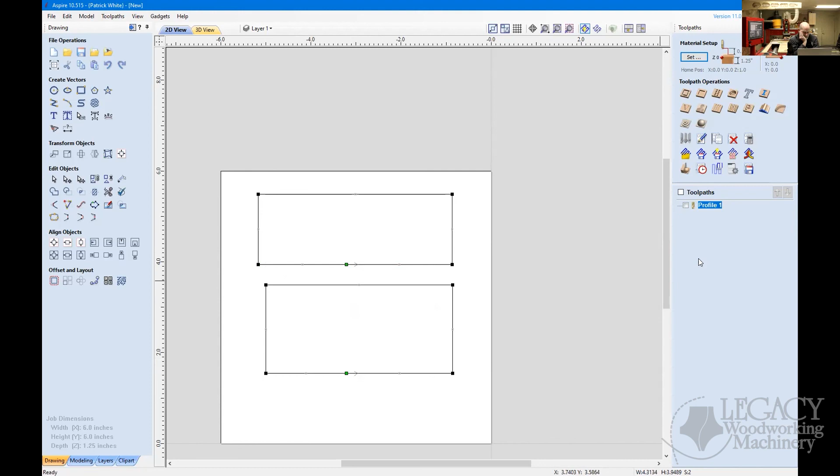Everybody can see this on the screen? When you create a profile or a rectangle, and you highlight your vectors and hit N for node, it's going to give you your start point. So if you want to do a lead in and a lead out from the inside, if you're using a compression bit, you're going to need to click on this, right click, and insert a point. And then change this point to the start point. Now you got the two start points. Now when you go into your leads, you can change this to whatever you want.

You can have it as a lead-in length and whatever radiuses you want. Then when you calculate it, let's see, reset preview. Now it's going to lead in from the inside and it's going to lead out from the inside. Right, okay. So if you were cutting on the outside of the vector, it would probably lead in from the outside. Yeah, so if I change that to the outside and I recalculate it, it's going to lead in from the outside.

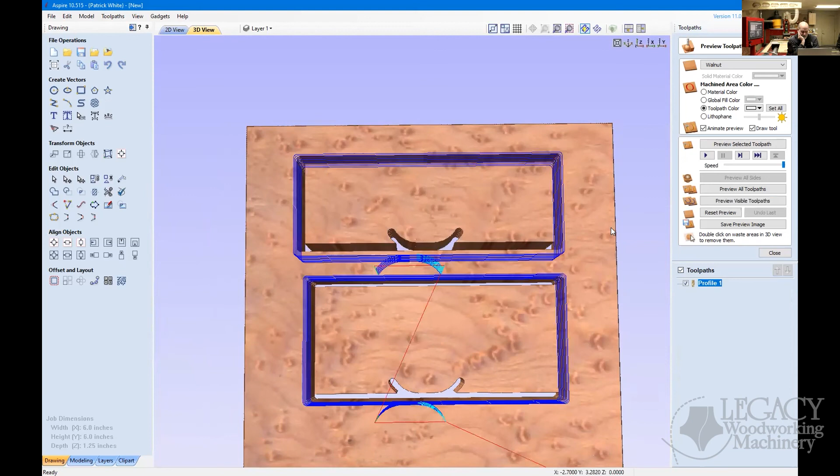Perfect. Wow. Thank you very much. Learned something new. Go ahead. I'm sorry. What's the value of that?

So if you're using a compression bit, on the bottom of your bit you have about 1/4 inch of an upcut. If you just drop it in straight, it's going to tear up your material. So you lead in from waste material into your good part, whether you're leading in or you're leading out. Got it. Thank you. Yep, you're welcome. I'm going to stop sharing. Yep. It also won't leave a witness mark. And it won't leave a witness mark.

And some of the bigger machines I've worked on on the industrial side, when I was at the school, they have a lot of that stuff built in. You don't have to go in all the time. It depends on how you have the system set up, but that's when you're doing the same thing over and over again. They also use that for plasma cutters. Correct. Because they leave burnt marks, so they'll lead in from the inside and come out to the outside. Yep, correct. You're basically destroying your waste material instead of your good piece.

Especially when you're leading in with a compression bit, or just about any bit, you actually will get a better cut if you do a lead-in. Sometimes you'll see the mark where you just plunge, because sometimes we're using a quarter inch or even an 1/8 inch bit. I've seen it with an 1/8 inch bit, you can see a little cut on the inside if you don't lead in. Excellent. Thank you for that tip and that information.